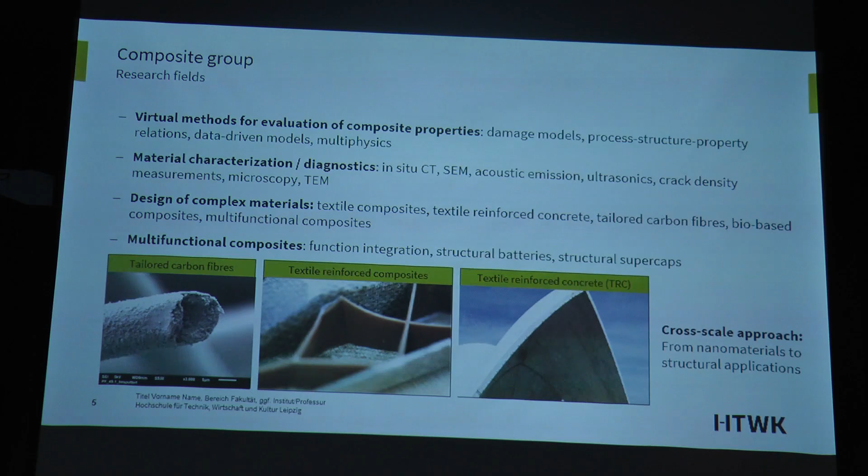I have two research groups. One research group is the so-called Composite Circularity Lab, CCL, which mainly deals with topics of circularity, recycling, sustainability. I'll show some examples of that research later in my talk. The second research group, the Advanced Materials and Structures Lab, focuses on multifunctional composites, on nanocomposites, on additive manufacturing, but also on advanced models for composite design.

So, enough talk about me. My presentation is divided into three major parts, but before coming to this, I want to briefly introduce the problem. We have heard about this in the morning session as well. There was a lot of talking already by Professor Petru or Olga about sustainability.

As you may know, the ambition of the European Union is to become the first continent who becomes climate neutral. And there's a lot of political effort also towards that direction, the Green Deal, and also the so-called twin transition, meaning green transition and digital transition.

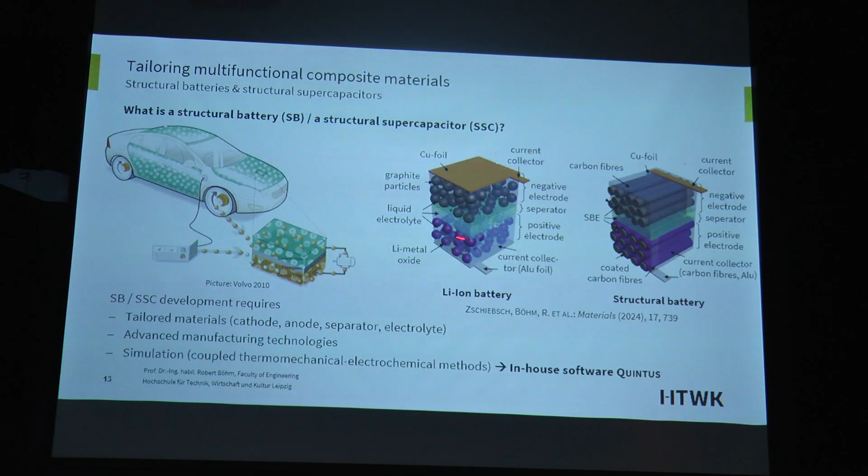Or the door of your car could be the battery. And you don't need a battery anymore, or at least smaller batteries. So there's a liquid electrolyte and a separator to avoid short circuit, and everything is packed into a pouch bag made of aluminium or copper.

So we first produce the parts of the carbon fiber of the battery. And then this is all assembled into a pouch cell and cured. And in the end you have something like this that looks pretty much like a normal battery. You see some pictures of the test on the left.

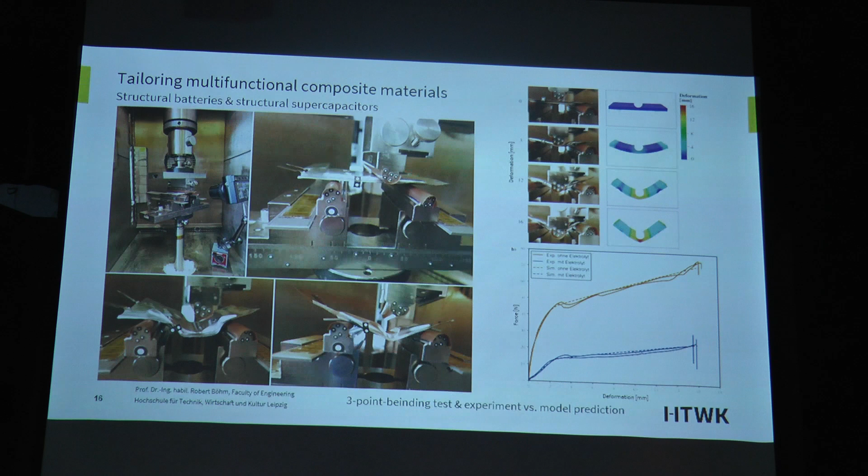And we also developed models for predicting the properties of those materials. Here in this picture you see a comparison of experiment versus simulation. It fits pretty well. So the result of that study is like this.

An increase of performance compared to the current approaches in literature with a unidirectional anode and a woven cathode. So that is actually what we have right now.

Then we have combined this with a second material, so-called carbon nanotube fibers. Everybody has heard of carbon nanotubes already, and you can also produce fibers out of that. And those fibers are very flexible. They are even so flexible you can make a knot into the fiber and it does not crack. So this is kind of spectacular.

Those materials are suitable. We have produced a drone. So this is a micro drone. So the size is here. It's very small, fits on your hand. You can put it on your hand. It looks like this.

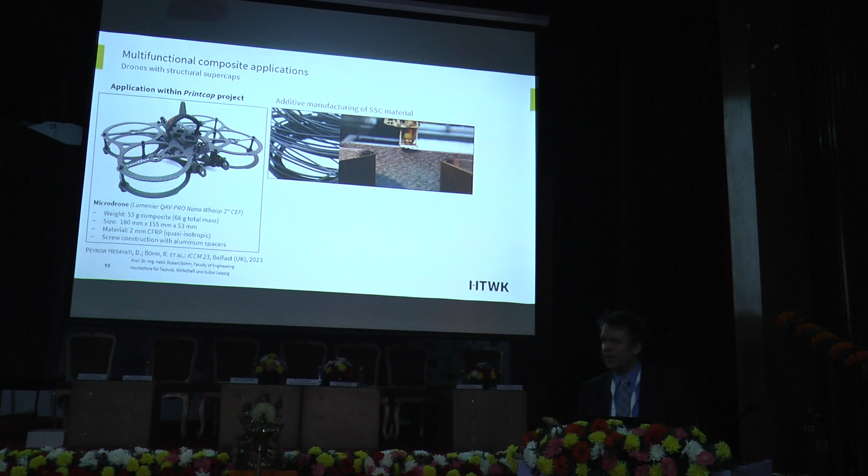We have produced the material by additive manufacturing, so 3D printing. We investigated the microstructure, did numerical simulation to prove that such a structure holds the load, and also investigated recycling issues. That's the question that comes up very often in that context.

And the end looks like this. So this is like a mini drone. There's a little video here. So we made it fly for a couple of seconds, without any battery. There's no battery inside that drone. The material itself is the battery, like I showed. So still there's a lot to improve there, but we proved that this technology is able to work out.

The second example that I'm going to show, I've picked this particularly for the Indian audience here, is nanomaterials. It's very well known that you can use nanocomposites for sensing purposes. Due to time issues, I'm not going to explain all the scientific details.

I'm coming to the application immediately. So what we have done is we produced a nanocomposite containing carbon nanomaterials. In this case, again, carbon nanotubes. We mixed the carbon nanotubes with classical polymers, and we 3D printed those devices here with standard 3D printers. So this is not rocket science, just normal printers.

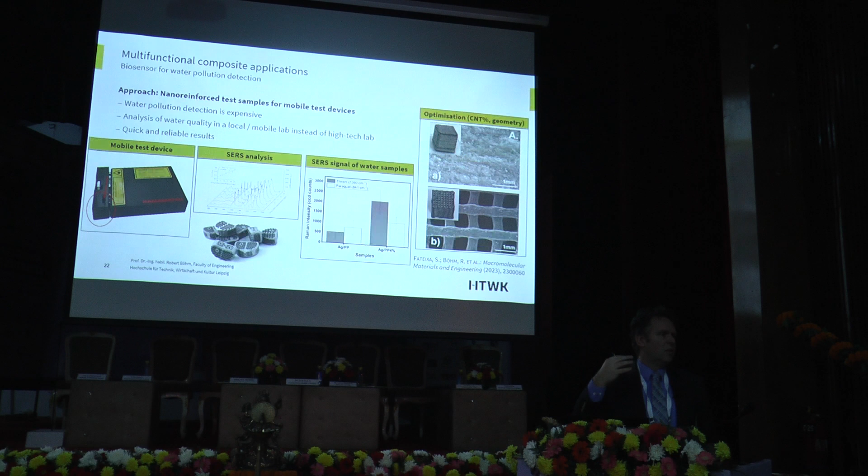Immediately, with pretty good results. So you may know that implants, like if you have implants for your head or your knee, can be produced with composites, also with 3D printing. And there the important question is, you have to have a material where human cells can grow into. So your body cells must be able to grow into that implant, to have a good connection between the implant and your real body. And we've seen that in the morning already with lattice structures.

So important here is the geometry. Different geometries, but also providing conditions for the human cells to grow into.

And there, nanomaterials or nanocomposites can help as well. So you've seen this drone already, the little object flying for a couple of seconds. And I'm doing a lot of work in modeling.

When you want to model those multifunctional materials, you have a lot of dirty multi-physics problems. A lot of people say composites are difficult, which is true, and also a challenge for us as researchers. But those multifunctional materials are even more difficult, because you have electrochemical problems. I'm not a chemist, I don't understand that stuff.

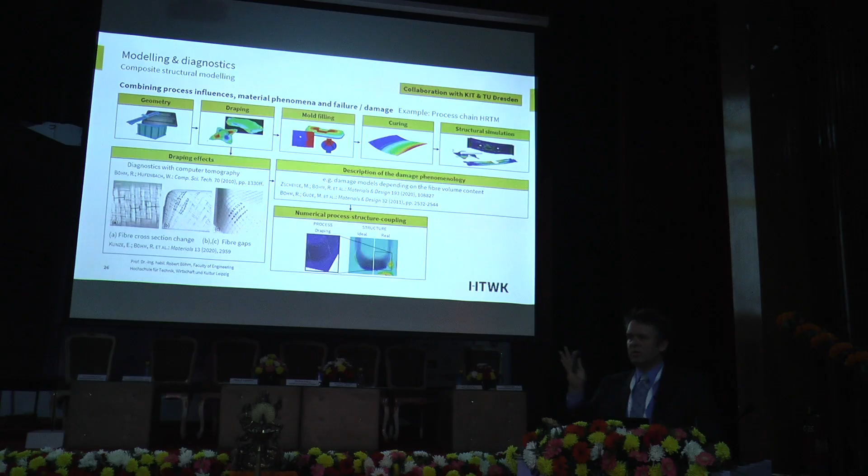Usually if you take a textile and drape it into a complex geometry like this, the textile will not look regular or as planned, but there are certain draping effects, some call it draping errors, that have to be considered. So we did a lot of work together with KIT, Karlsruhe Institute of Technology in Germany, to model those effects with the coupling of computer tomography diagnostics and simulation analysis.

And now that brings me to the third and final part of my talk: sustainability and circularity. Here I have again two examples to show.

And the first one is circularity of large-scale composites. So we have seen already this morning that we can produce large-scale composites for many applications, wind energy blades, airplanes, etc. Especially wind energy has seen a big growth in Europe, but the thing is, such a wind turbine only has a lifetime of 25 years.

And afterwards, it looks like this - it's waste. And we as composite engineers, we claim this is a high-performance material. We should not treat that as waste. I always say, I don't take my gold, my golden ring, and put it to landfill. This is expensive stuff, we should not throw it away.

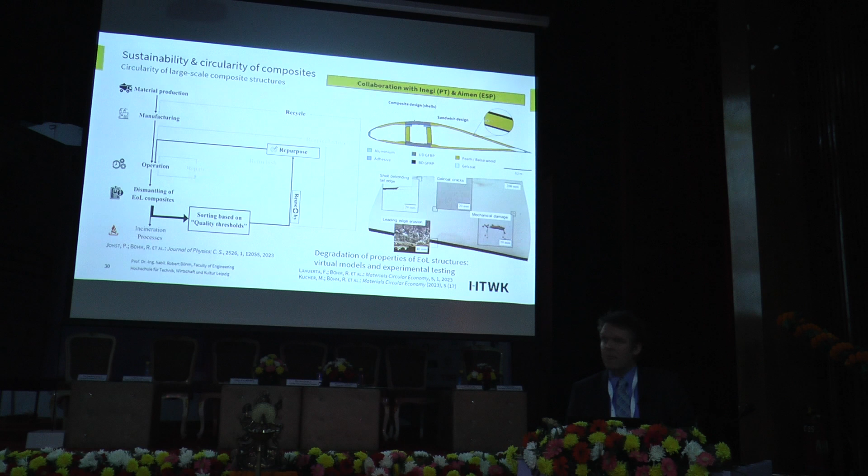So there's a lot of conversation about circularity, and the approach is to use that material again. We have created a strategy that we call the R6 strategy - so when a material is produced, put into operation, and reaches end of life, we can reuse that material for something else. What I investigated was repurposing, the reuse of a material for other purposes.

I'm going to show an example about this. What we have done is investigate floating PV systems, so swimming solar cells, which is very interesting for countries with less space. There are parts in Asia - Singapore, Hong Kong - where there's no space, but also in Europe. So a lot of people put solar cells on the water.

This has many advantages, I don't want to go into detail here, but usually those swimming solar cells are placed on regular plastic elements, which are throwaway pieces more or less, but they also create a lot of waste which can be avoided. So we put the solar cell onto a rotor blade, and then we upscaled this to a larger element with 4 solar cells - this here is 5 meters by 2 meters.

We did a lot of simulation, we produced those elements, and we also tested this in a water test, and that looks like this. So we created some waves, to prove that those elements can also be used when there's a lot of waves on the sea, etc.

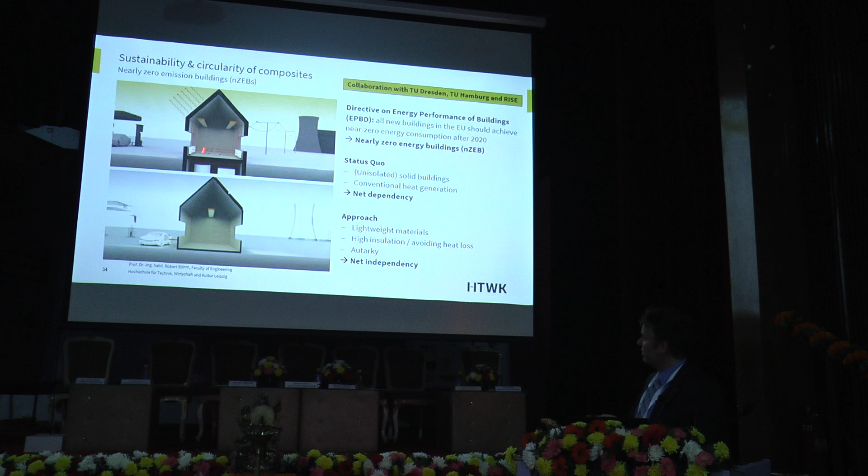So old structures look like this: thick houses. You need electricity to feed them. You have a lot of thermal losses and a lot of energy consumption. And the idea, which is also like in Europe kind of a law already, is to provide zero emission buildings,

which don't need any additional energy. You can create them probably by solar cells. And especially in a sunny country like India, you could argue, okay, you could create so much energy that you have more energy than you need, and then you can feed electric cars by this. So that is the idea. And the question now is, how can you do this?

You have to have lightweight materials. Oh, he's showing a clock. I have to stop talking. Give me 2 more minutes. You need lightweight materials with high insulation properties.

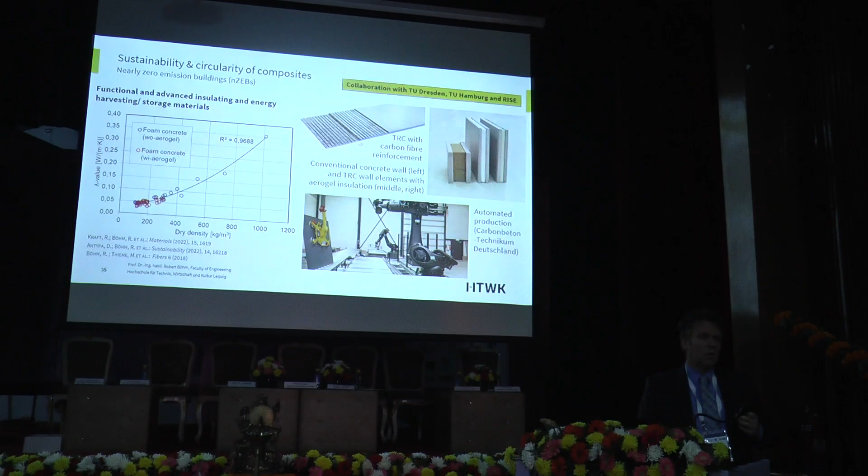And for that purpose, we used carbon concrete. So concrete reinforced with carbon fibers, and we produced sandwiches with aerogels as a sandwich core. It looks like this here. So a material which has a very low lambda value, so very good thermal properties. And we are able to produce this material in automated production.

So I'm going to skip the manufacturing due to time issues. We also tested those materials in bending experiments and show that the properties are very, very good. So that brings me to the summary of my talk. So I hope that...

May I now invite Professor Rajesh Kumar Mishra from Czech University of Life Sciences.

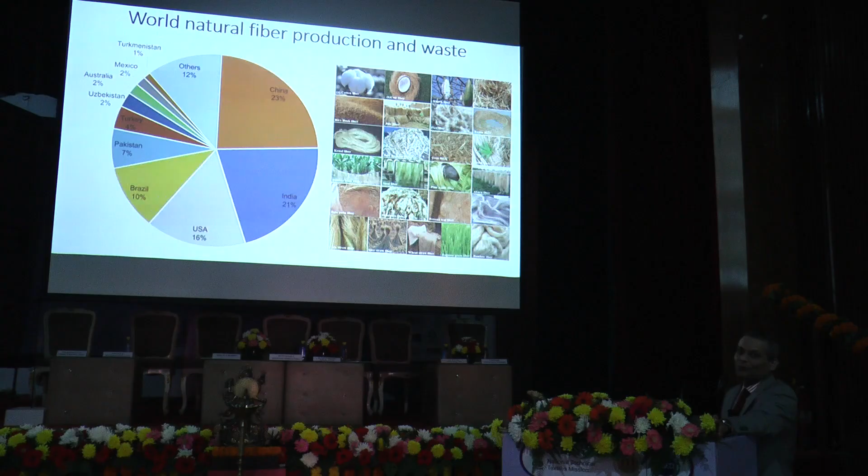India is probably one of the biggest, if China and India to be compared or not, doesn't matter, but India is growing with its potential of natural fiber and its availability. At the same time, we are also producing huge amount of waste. Waste for other industries, but it is the raw material for us as material scientists. So we try to prepare value-added, high-value products out of waste material. Today I will touch upon a few ideas how waste materials can be converted into high-value products, and that is where comes the importance of polymer-based composite materials.

As we know, cotton, hemp, sisal, bamboo fiber, fiber from pineapple waste, from coconut waste, everything from waste. We have a lot of natural fiber. Mainly when they are derived from plants, they are rich in cellulose. And cellulose is a highly crystalline ingredient which is helpful for strengthening of materials like composites.

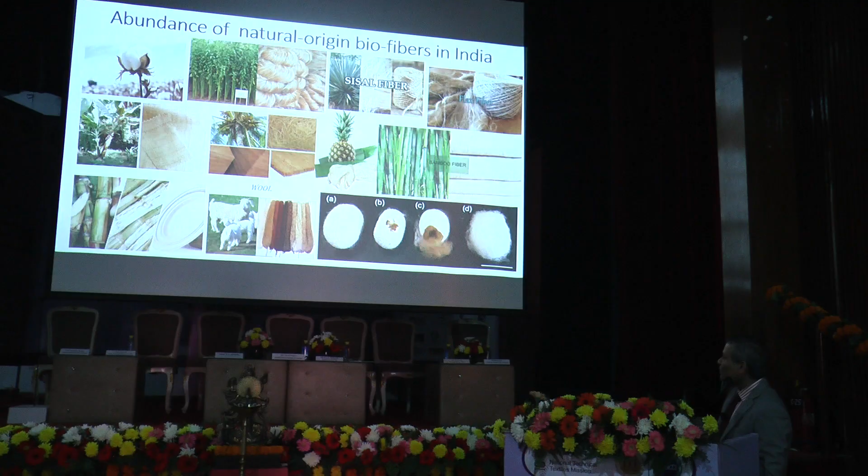At the same time, we have abundance of protein-based fibers from silk, for example. The best quality fiber is excellent for thermal insulation, for decorative textiles, but there is also a lot of waste in the process. And we are now exploring possibilities how to produce high-value composites from such waste fibers.

We cannot leave any single fiber to be wasted. It is now different era. Now little bit information how is India's outlook. There is some information on the internet, and India is one of the largest, in fact it is the largest producer of cotton and jute fiber.

And there is a big thrust to further improve production of silk and jute, etc. in future. There are many schemes coming up by the government of India, especially from the Ministry of Textiles, about cotton productivity, natural fiber scheme, silk scheme. So these are many initiatives these days being taken up, how to improve the production, application and potential of natural origin fibers in multidisciplinary applications.

And composites are one of emerging areas where we can utilize. Since I am a material scientist, I focus on agro waste. My university at present is focused on agricultural products. Fibers are natural fibers, also are agro products.

Wool from sheep is an agro product. Silk also is an agro product. But let's not forget several other waste materials from agricultural processes. For example, rice husk, the cover of a rice grain, is used as cattle feed, or sometimes people just burn it to prepare carbon. It's not a high energy producing fuel, but we try to use it in reinforcement of composites.

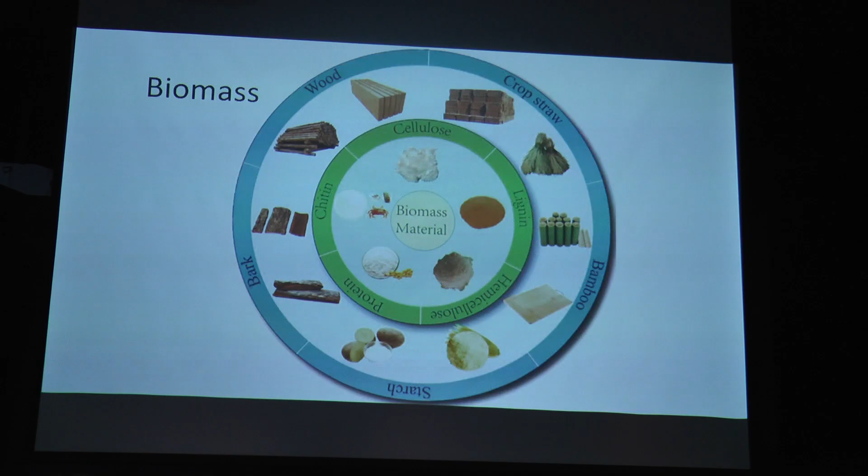Composite - I think the definition is not required because you already understand there is a reinforcement and a matrix, and in this case we are using fiber material as reinforcement. Fibers, which are core to textile engineering, are a very special form mainly of polymers because of the high orientation of polymer chains along the axis. I won't go too much into the cellulose and ingredients of plant products, but we must keep in mind cellulose is key to reinforcement in composites.

We already know for centuries that a lot of fibers exist in nature, starting from cotton to jute, some fibers from fruits, some fibers from leaves, some fibers from stem, and now we will explore possibilities to extract fibers from other lesser known parts of the plant.

Whatever we do, we are attached to nature. We are part of nature, and nature is the source of all scientific innovations. If we understand things around us, we are able to produce and reproduce things. In fact, if we learn from nature, we will be excellent scientists.

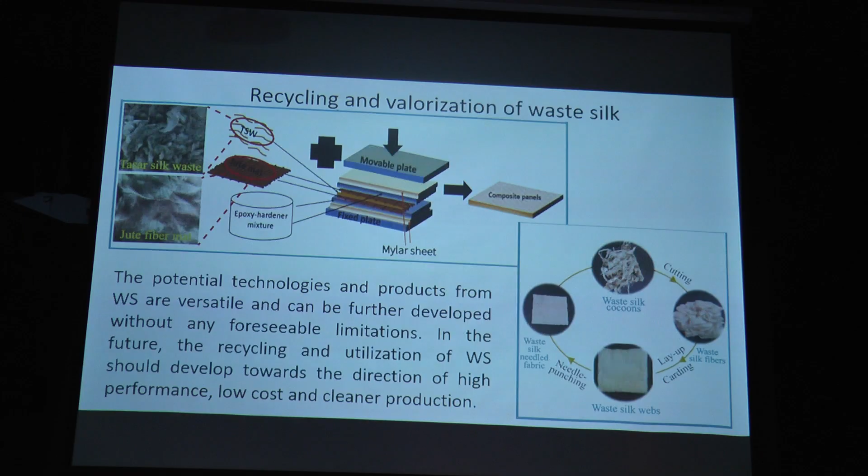In this case, many of my colleagues spoke about making sandwich composites. We make layers of natural fiber, layers of synthetic fiber, glass fiber, with jute, with flax, woven fabrics, non-woven fabrics, and make a comprehensive three-dimensional robust composite.

Maybe you are aware that the whole building can be 3D printed, not just brick by brick and being plastered. The conventional process takes 6 months, 1 year, 10 years, but this process is much faster. For example, an auditorium like this can be 3D printed in 1 week's time, and it will still be robust and strong because it is built step-by-step, layer by layer.

India, like many other countries with big oceans, has plenty of coconut. Coconut is a nice fruit, but there is a lot of waste fiber, coconut husk, coconut fiber. We prepare carpets, ropes, they already exist, but still there is waste. Any textile process produces a lot of waste. Also as consumers, we produce a lot of used clothes annually. We are trying to find ways to recycle and reuse such consumer waste, agricultural waste, and textile industry waste.

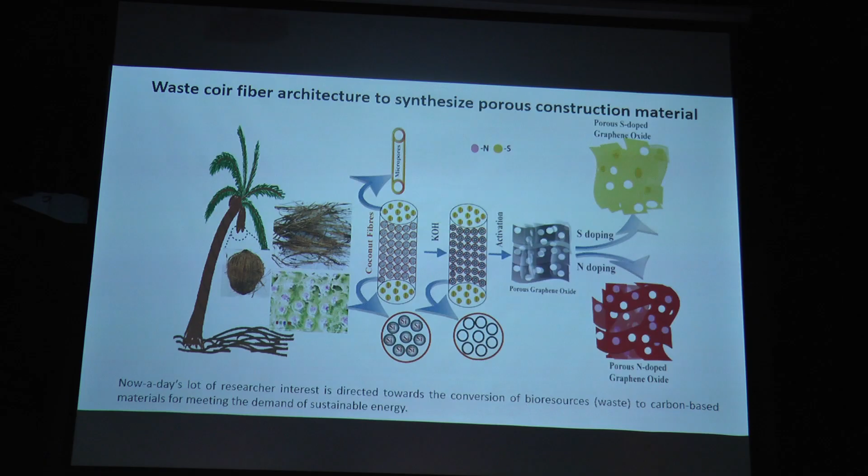In which processes do we produce a lot of waste in textile processing? For example, in cotton carding, combing, there is a lot of short fiber, and conventionally that is used for making pillows or something, or discarded as oil waste. So now our goal is to identify such waste materials. For example, hard waste in weaving can also be made into secondary yarns.

We are using it in automotive applications, for example. It needs to absorb sound and noise, and these fibers are very good candidates because they have channels of air which can absorb sound.

Corn is produced in India and everywhere in the world, and except for the crop, there is a lot of fibrous waste from the leaves and from the cob, and it's possible to extract these fibers for reinforcement.

You know this process, squeezing sugar cane to produce juice and sugar afterwards. But this bagasse, or the waste of sugar cane, is also highly fibrous material. It's not just good for composting or burning. We are able to extract fibers, not for wearing, but definitely for reinforcement into composites by impregnation with some suitable resin. There are examples where such materials are combined with other synthetic fibers.

Why synthetic fibers? Still, we are in a hybrid stage. Why? Synthetic fibers are definitely stronger because we know how to create stronger fibers. Nature produces fibers that are not perfectly oriented, not perfectly crystalline, but they are degradable and sustainable. Therefore, we try to adopt natural materials and combine them with high performance fibers, maybe high performance waste fibers, and this hybrid material is definitely a solution at this stage because they are partly degradable, partly high performance.

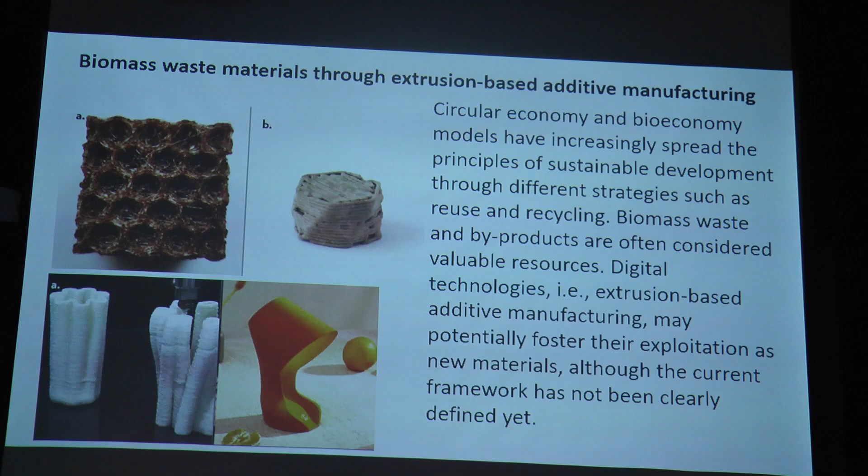3D printing or additive manufacturing is a very good technique because it involves high precision. At the same time, the raw material can be based on natural fillers. I talked about hybridization, so sometimes recycled plastic bottles are combined with biomass, especially from agricultural waste, to produce composites. Currently, our research is focused on hybrid composites, combining natural fibers, natural waste, and waste of synthetics.

What are applications of such composites? For lightweight yet robust transportation systems, furniture, sports items, also automotive components - I will show something later. Another very high value fiber waste is from palm fiber. I will skip some things, but I will mention definitely what are the potential candidates of fiber waste for making composites.

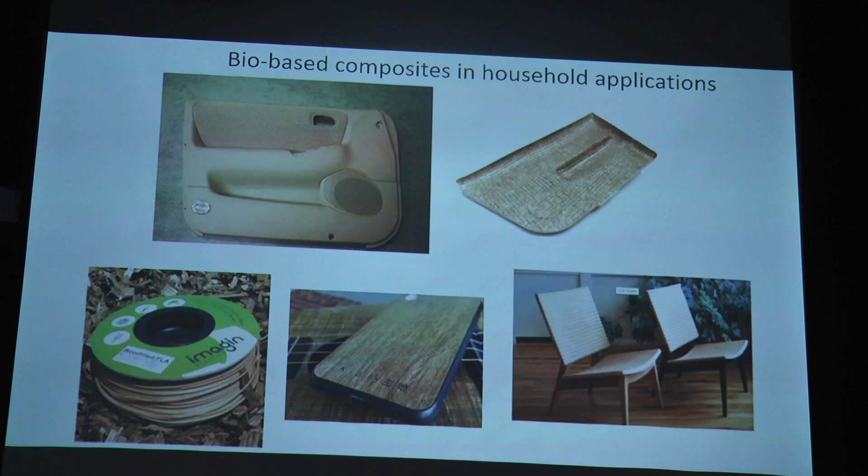Here are examples of automotive applications, buildings, electrical insulation because they are insulators of electricity, for ships and things like that. We can make construction materials, for example artificial wood from wood particles for housing, and porous concrete. This is especially important in snowy countries or when there is high rain, so this concrete can drain the water down, and also these channels are very good for thermal insulation.

We have an abundance of bast fibers from other agricultural crops. We can make composites, and I want to just mention that some of these natural fiber based composites are no less than synthetic fiber based composites. Therefore, flax, for example, is excellent to replace glass or carbon in certain cases, not everywhere. Bicycles are made from composites.

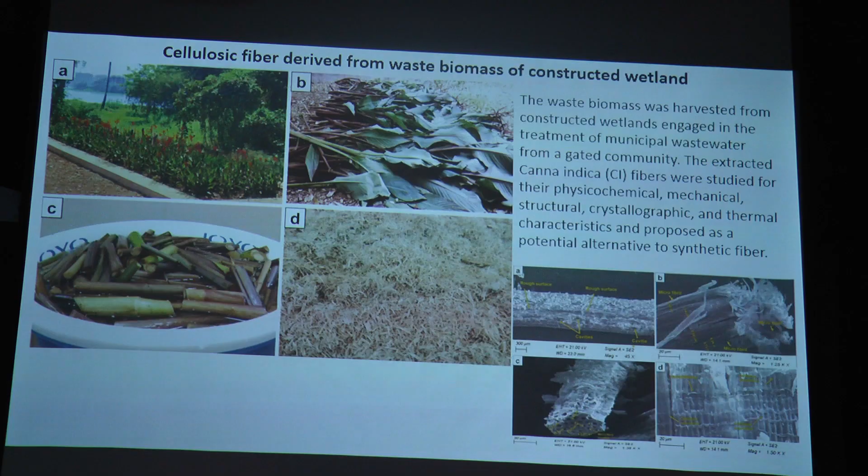Some porous plants like the banana stem and wetland plants are also porous for making composites with sound insulation performance. Sound insulation is important in today's context, as a lot of vehicles and noise are being produced.

Waste of wool - there are many advantages of natural fiber based composites, but there are also some critical issues to be taken care of. We have to make a compromise.

What about buildings? Here is a special construction material made from bamboo and glass. So it's possible - bamboo can sometimes be misleading, because bamboo fiber is not produced directly from the plant but by a chemical process like solvent spinning, as we know.

So this is otherwise natural bamboo. We make construction materials to make houses. Basalt is high value fiber from nature, also from volcanoes. We combine basalt with jute, basalt with natural fibers to have high value composites. Coconut shell, for example, we use it for making particles of micron and nano size to be used in fillers.

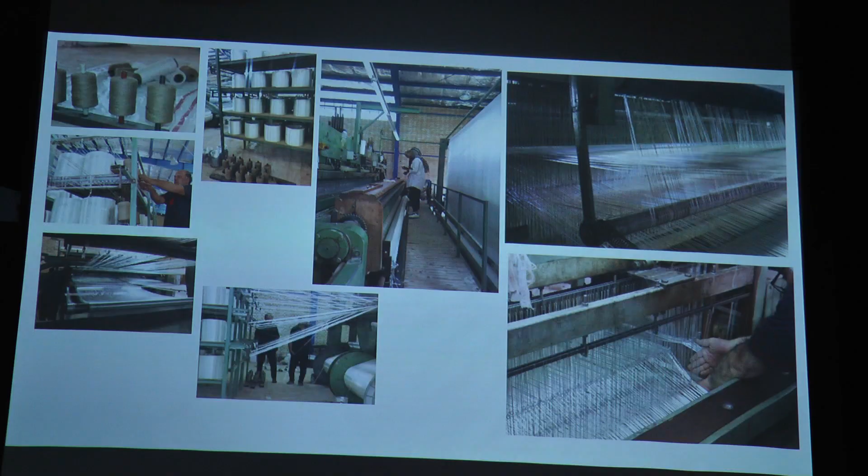Professor Robert and others spoke about nano composites. So we use natural fillers from agro waste in composites. We make hybrid composites. Here is an example of a spacer composite - you can see jute fiber, polyester and resin epoxy. These spacers are very good for small kiosks in airports, containers, trucks, like that. And you can see samples.

These are based on natural fiber and synthetic hybridization. They have excellent sound absorption. We do a little bit of modeling as well. Compressional resilience is excellent because these spacers can act like springs. They can absorb the impact and recover. For example, you can think of applications in military and other fields.

So I want to thank everyone for your kind attention. And

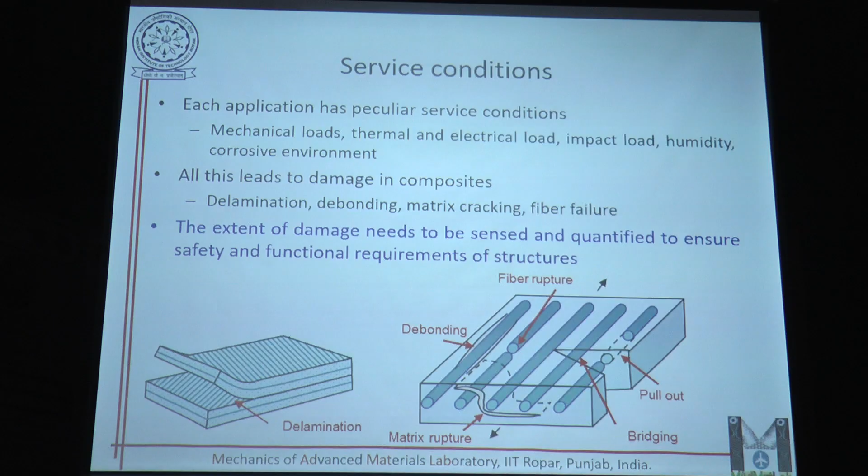Now all these basically lead to different kinds of damages in the system. One of the primary damages in composites that we all know is delamination, which is the breaking between the plies, or debonding, which is the failure of the bond between the matrix and the fiber, matrix cracking, and fiber failure. Now, when we want to ensure the safety of operations during service conditions, it is very important to quantify and assess this damage.

Where is the damage, how wide or large is it, and how is it going to affect the service life of the component? These are very important questions we need to ask, and we are trying ways to address this through the intervention of nanotechnology in the composite design itself.

So what is the challenge here? Unlike metals, there are a lot of good techniques available, like radiography or CT scan, where we can detect damage during quality control at the industry scale. But composites are a completely different ball game altogether.

Why? Because they are inhomogeneous and anisotropic, and that creates a lot of problems. The second problem is that many times delamination is not on the surface, it is in the bulk of the system. So from the outside you don't see it - it looks perfectly fine, but inside the damage is growing without you even knowing it. And then it leads to catastrophic failure, because once the damage is sufficiently large, you cannot prevent it anymore.

Then multiple modes exist, right? Like I mentioned in the previous slide, there is debonding, delamination, and fiber cracking. All of these make it difficult to detect the damage correctly. But of course, when there is a problem, it makes it more interesting, and that's why we are working on it.

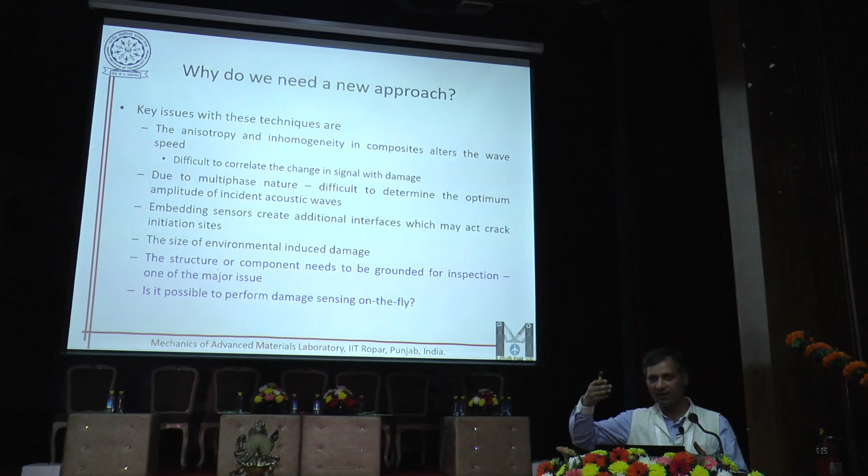The problem with these approaches is that, for example, if you are using ultrasonic waves, the wave speed will be different in a fiber versus a matrix. Once you get the change in signal, you have to relate it to the damage. Because there are multiple materials present inside the system, you don't know whether the change in signal is because of the interface or because of the real damage. That's a big question these people are asking.

Same thing if you are using an acoustic based technique. What is the optimum amplitude to send to the material or structure so that I can capture the damage? So these are some of the limitations, that these methods are not as efficient in detecting damage in composites as compared to their efficiency in metals.

Then if you are using embedded sensors, basically you are creating more interfaces into the system. The more interfaces, they basically act as crack nucleating sites, and the crack starts propagating there, because materials don't like any interfaces.

Then other thing is the size of environmental damage. So when you have a wind turbine exposed to a lot of varying atmospheric conditions, there will be a big scatter in the size of the damage. Some damage may be in millimeters, some in microns. So what kind of technique are you going to follow? Those are the questions that motivated us to go for an alternative technique.

Another big problem with these techniques is that you have to ground the structure. For example, your aircraft is flying and you want to inspect it. You cannot do it on the fly. You have to ground the aircraft, you have to ground the component or structure. So that means it cannot be used during the time it is being inspected.

So the question is, how can we accurately monitor all these kinds of damage, and is it possible to do the same thing on the fly, without really grounding the structure? That will save a lot of time in terms of inspection and associated cost. So what exactly are we looking for? An efficient strategy that can sense the damage while the component is really in use.

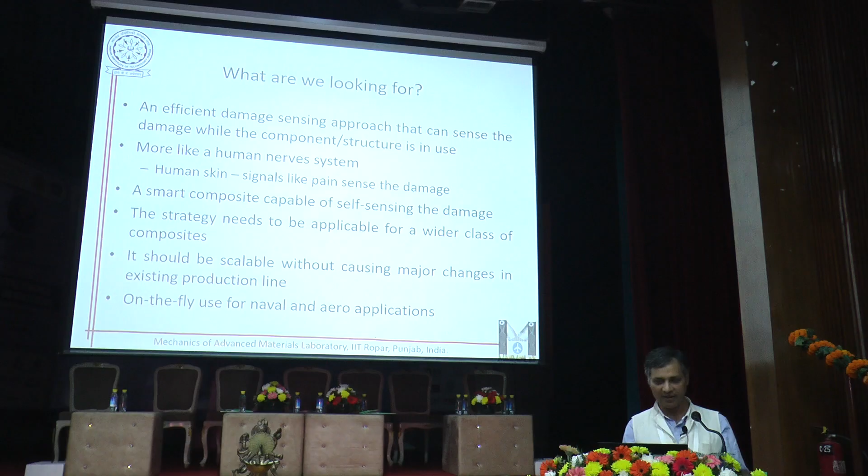If you look at the analogy of our human nervous system: whenever we have a cut, we always get a sensor, which sends a signal that you feel as pain. That pain tells you where the cut is and how big it is, without really looking at it. So what we want to create is some kind of smart composite which has its own nervous system, so that whenever there is damage or some discontinuity in the system, we can sense it.

Now, once we are okay with the idea, the next question is, can I scale it for industrial use? Because if it only remains in the lab, it is useless. So that's another question we are looking at. Another thing is on-the-fly use for naval and aero applications, because there's a huge cost associated with grounding the system, and we don't want that.

So it's not really a new concept, the problem is that nobody has used it for insulating materials like Kevlar or glass fiber composite. What we're trying to do is, whenever there is damage, meaning a discontinuity in the system, that discontinuity will lead to a local increase in the resistance of the material. If we can monitor that change in resistance as a function of the damage and map it to the size of the damage, we know where the damage is and how big it is. That is what we are trying to create here.

Now the problem with Kevlar is that it's a very high resistance material, so it is very difficult to accurately monitor the change in resistance, because the resistance is on the order of 10 to the power 6. When something is megaohms or even higher, if there is a change of 10 ohms, you can't detect it, it is almost negligibly small.

So first we need to work out basically in terms of the resistance, we need to improve the conductivity of the Kevlar or decrease the electrical resistance of the Kevlar. On the other hand, you have CNT, which is very highly electrically conducting material. It has very good electrical properties, optical properties, almost all properties are good.

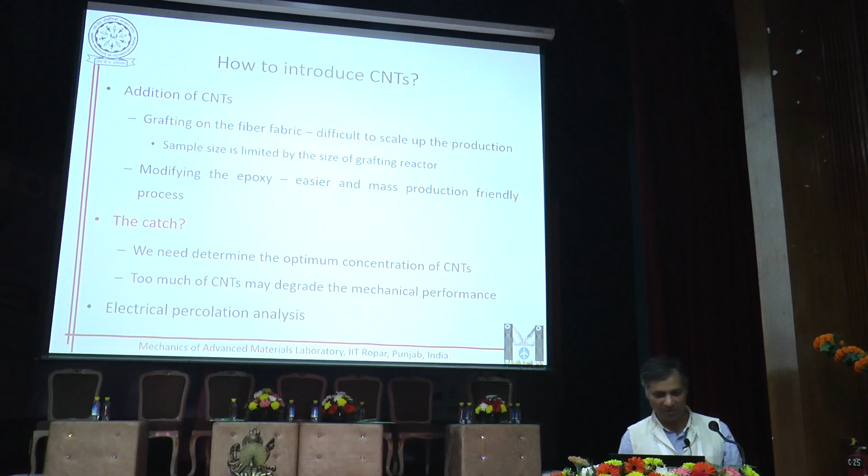Okay, so this is easier. Of course it is easy to scale also, because you just have to use the modified resin in your existing manufacturing setup. So you don't need to make any wholesale change in the production line of the composite. That's attractive for the industrial people.

Now the catch here is that we need to determine the optimum concentration - how much CNT to be used, what is the right amount of CNT. Because if you are doing too much, there are other consequences. For example, the viscosity of the resin will be too high, and you cannot process the composite using all the composite processing techniques. So those challenges will come.

So that's what we determined using electrical percolation analysis. Of course there is a lot of theoretical framework that I am not going too much into. But after doing some theoretical calculation, we basically came up with a concentration of about 0.58%, and then we verified it with the experiment by dispersing the CNTs into epoxy using probe sonication.

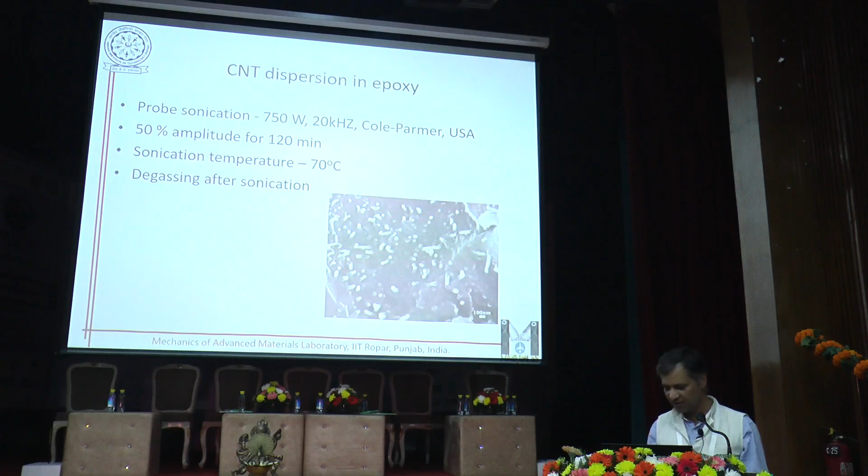And that has a very detrimental effect on the composite properties, because the wetting of the fabric will not be proper when your resin is more viscous. So you don't have a good bonding between the fiber and the matrix, or you have poor debonding strength. So basically, from this analysis we came up with 0.58% as an okay choice to modify the conventional resin system.

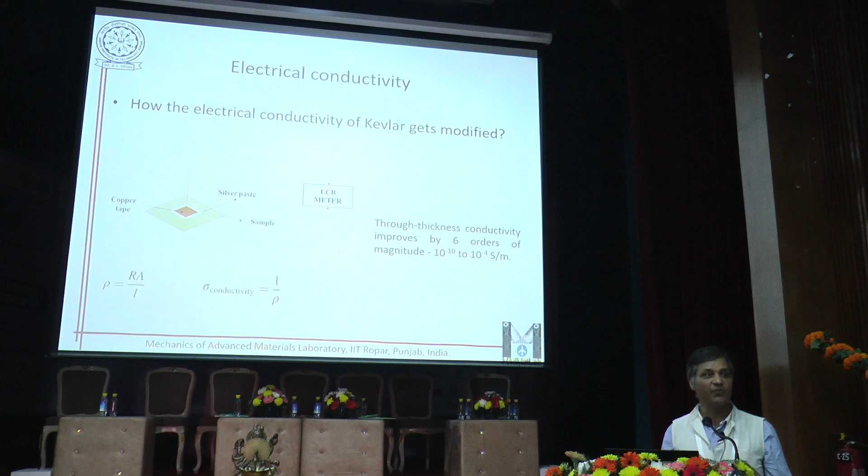Then we did the electrical analysis. There is a huge jump in electrical conductivity, improved by an order of 6. So 10⁻10 Siemens per meter is the conventional electrical conductivity of conventional Kevlar composite, and it goes to 10⁻4. It's a quite big jump in terms of electrical conductivity, which means the resistance of the composite has come down significantly. Now we can basically monitor the change in resistance through our measurements.

Okay, let's do it. Then we tested almost all kinds of properties with respect to the mechanical properties of the composite. For example, interlaminar shear strength shows a 36% increase, and mode 1, mode 2 fracture toughness also improves quite a lot. Mode 1 is more like 60%, and mode 2 is about 30%.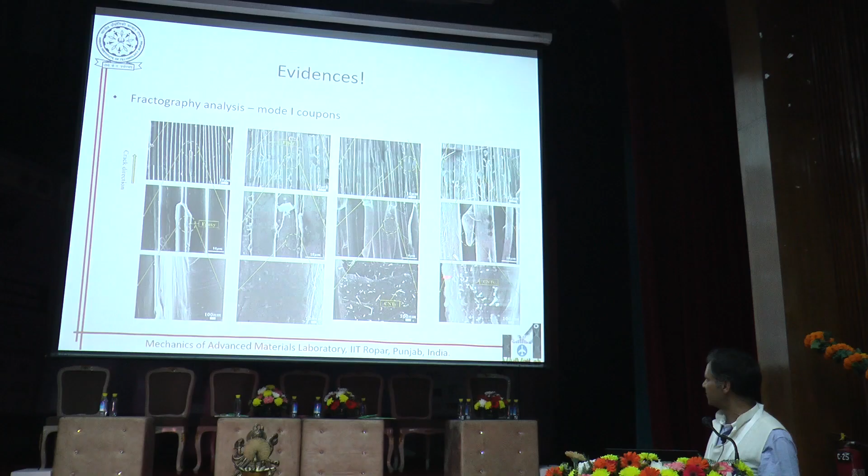So we have good evidence to support this mechanism. You can do the fractography analysis, look more carefully at the pictures, like you see a lot of matrix cracking, and these are CNTs pulling out here, so they take extra energy from the system, and same thing we observed in mode 2 as well. So all these mechanisms lead to higher toughness or higher mechanical properties.

Okay, then we looked at the damage sensing, right? So we have done two tests, this is under mode 1 and this is under mode 2. You look, this is quite interesting. What we have plotted here is the change in resistance normalized by the base resistance, and this is the percentage. So as you basically apply the load or apply the displacement, the load is increasing, and then resistance initially there is not significant change, but then it actually builds up, right?

So this is basically where the damage coalesces or damage evolves. Now at this point there is a sudden jump in the resistance, which basically marks the propagation of the crack inside the sample, which means there is a sudden failure in the system, right? And the same thing basically happens in mode 2 analysis. So this gives us a way to monitor the size of the crack inside the system, right?

Okay, this is one of the objectives that we want to see. The second question that we wanted to ask is, how can we use this in terms of other materials, right? So for that, first we need to understand how the variation of delta R with respect to delta a. Delta a is the size of the damage here, and then we can fit a power law type equation, where K and N become the material parameters, and for Kevlar it is about 2.2 for K and N is this.

But then the question is, is this applicable only for Kevlar? I mean, power law, you can fit anything with the power law right now, right? So then we tested some other compositions of the same thing, layered materials, right? You look here, like we have carbon fiber, glass fiber, and fiber metal laminates, these are glare panels. So we have tested the same thing in all these layered systems, and we found that the power law predicts the change in the evolution of the resistance quite well in all kinds of layered materials, with of course different K and N.

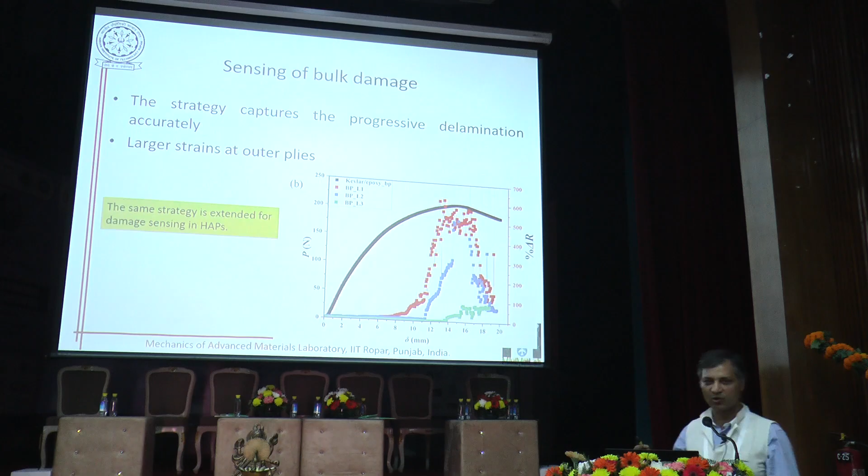Again, we used a similar kind of technique to detect the delamination in the bulk system. We put these bucky paper sheets, which are basically sheets of CNTs, between the laminas, and then we verified the same thing here. You can see that if you put them at different layers, you can basically monitor the progressive damage in the composite, because each signal comes after a certain time. So we can see how the damage grows inside the system.

So just to conclude the takeaway here, CNT dispersion allows you to monitor the change, basically monitor damage in the system. It also helps in improving the mechanical properties, right?

Okay, now we are looking to scale it up to use in some real application. I just quickly want to show this. So now the next step that we are trying to make is basically a textile which is more smart, just like our chameleon.

You can look at the change in the color. So what we are trying to integrate this with our damage sensing mechanism. So together we will have a very advanced system in terms of technical textiles which are used in the defense application mostly.

Thank you for your attention. And yeah, maybe you can get more ideas from talking with you. Thank you very much. Economical.

They might be more economical, but they will lack in the accuracy. So it depends on how accurately you want to measure the damage. But for concrete, it will work. We have seen now.

I'll be in touch. Thank you for your interaction. And since we are running sort of... Bye.

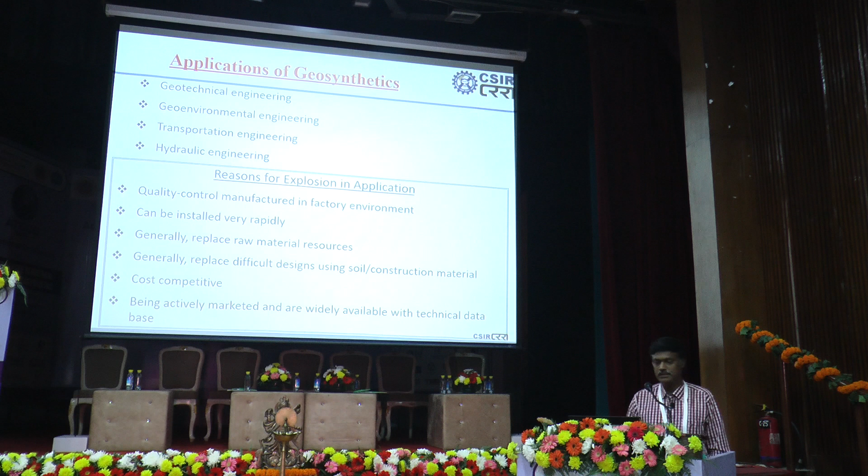And what are the applications? Geosynthetics will be applicable in the area of geotechnical engineering, geo-environmental, transportation, hydraulic. Why? Because we will get very good quality, whatever strength we need, within the time. So, without going deeper, these are the types of geosynthetics we use in geotechnical applications: geotextile, geomembrane, geogrid, clay liner, geocells, geocomposites, and so on.

So these are the geotextiles. You know very well that geotextiles are woven and non-woven. And geogrids, basically we use uniaxial geogrids for flyovers, and biaxial geogrids are useful for improving the bearing capacity. So these geogrids we use for flyovers, and biaxial especially we use for improving bearing capacities. And geonets, geomembranes,

especially, and geocells, wherever the subgrade CBR is very poor, geocells will give confinement for the material.

So geocomposites, especially for drainage purposes we are using, and these are geocomposite matrices for erosion control. Geofoam is a very good material where the subgrade is very poor and it won't take much load on the soil. We can use geofoam since the density will be very low, so it can be used, but we are not using it much because of non-availability. Otherwise the quantity is good here. If someone requests it, then we can use it in the field. The field is ready already.

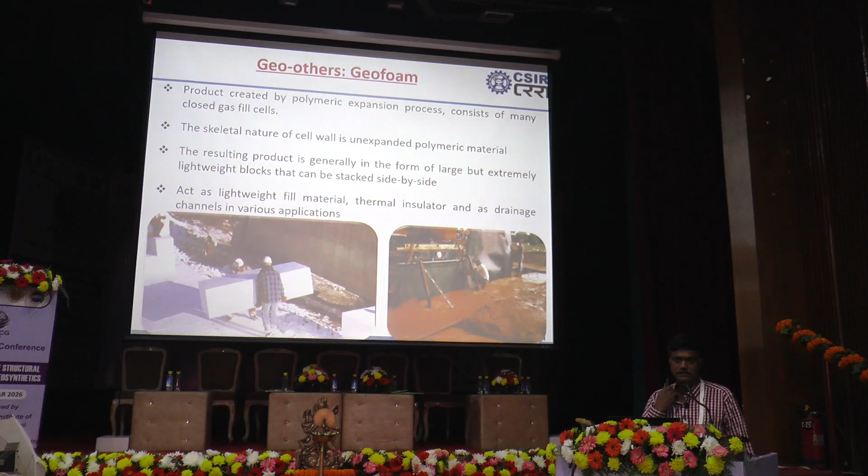And basically in geosynthetics, in the geotechnical area, we use them as a reinforcement, separation, filtration, drainage, fluid barriers and protection. These are the basic functions we use for geotechnical applications, and each material has its own function. So this is the table where we can use geotextiles.

So in such areas what we are doing is using geogrid or geocells, or a combination of both, at the subgrade level, so that your modulus of improvement factor increases, especially for black cotton soil.

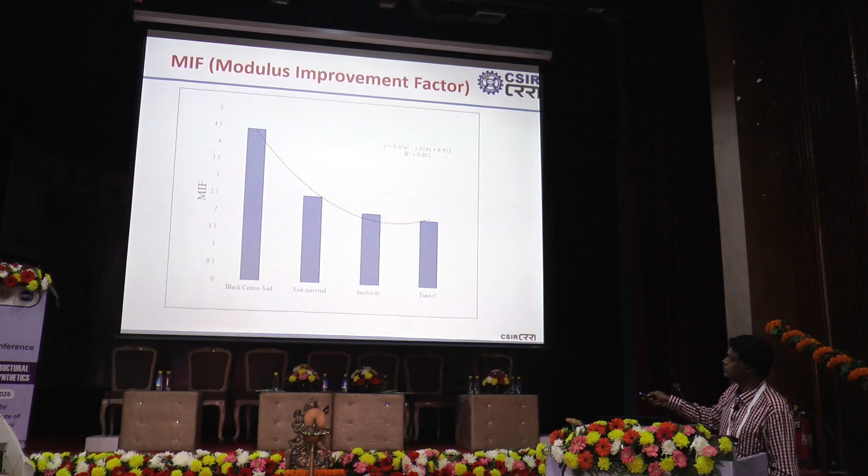In black cotton soil, the CBR (California Bearing Ratio) will be very low. If it comes to landslide material or weak material, the modulus improvement factor is low. So basically, if you want to use the geocell, we cannot use it blindly. Wherever the bearing capacity is low, meaning subgrade is low and CBR is low, that's where we have to use it. Only then will we get the advantage. Otherwise, if you use it elsewhere, you won't get much advantage.

See, this is the base course thickness, the pavement layer thickness. If the modulus improvement factor is 1, and the thickness is 250, and the remaining thicknesses are the same, here it becomes 125. So what we can do is reduce the base course thickness by approximately 14 to 50% if we use geocells.

So this is the pavement layer thickness. If you compare conventional normal pavement thickness with using geocells, the pavement thickness can be reduced. We can reduce the DBM layer by around 35%. The DBM layer is actually a very costly affair, so if you can save 35%, it's a good saving of material.

Similarly, geocells can also be used like a reinforced wall. This is in Bhutan, in the BRO compound, where they use it for car parking. So you can use it like this also. This is one of the applications of geocells.

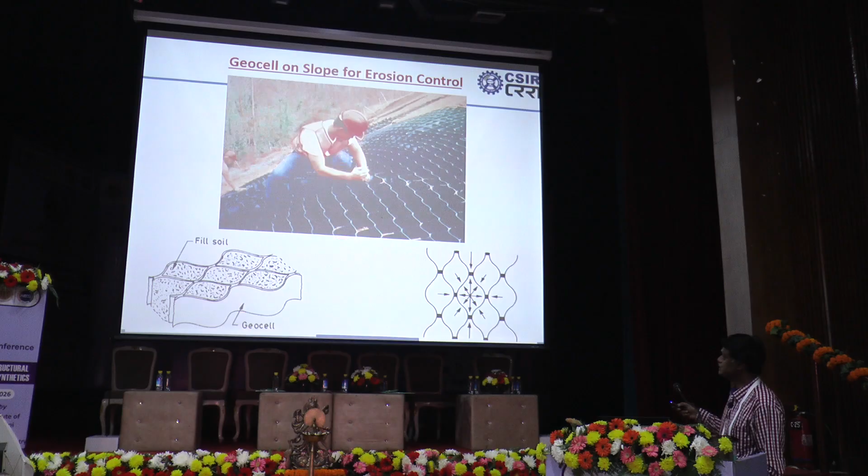This is a very common problem in highways - you will see many gully erosions along the embankments, even deeper ones. So if you want to prevent that, we can use geocells along the slopes. Like this, along the slopes, you can use them and fill up with soil so that you can avoid cracks on the embankment slope and prevent erosion.

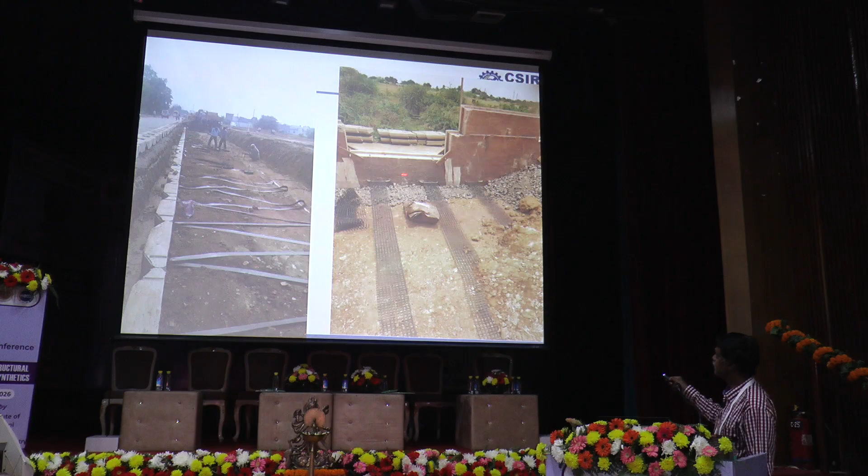So the main advantage of applying geosynthetics is this: here we have to use 600 mm of aggregate layer for the drainage bay. But instead of this 600 mm drainage bay, if I use a geocomposite drain, I can save 600 mm of material from natural resources. So you can save natural resources indirectly - that's the application of geosynthetics, because by using geocomposite, I can eliminate 600 mm of natural aggregates.

In the application of geosynthetics for ground improvement, we can use geotextile encased stone columns or geogrid encased stone columns. These all improve the ground, improving the bearing capacity. So this is one of the best examples of the application of geosynthetics.

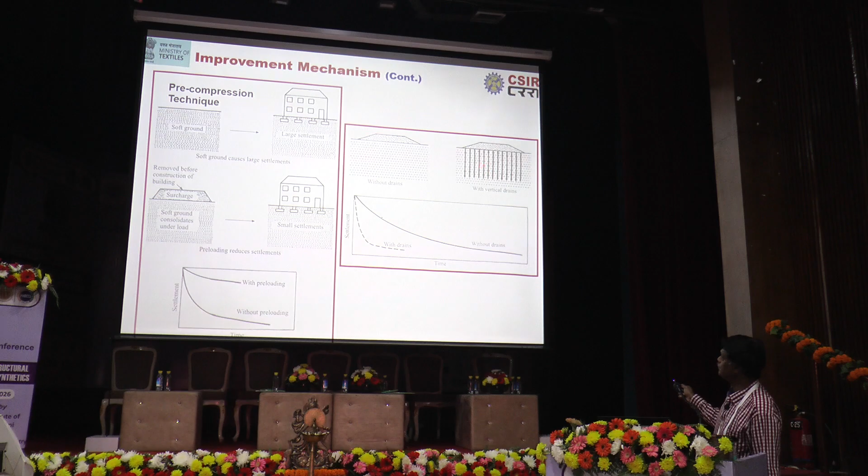And if the ground is again very soft and you have to put more loads, the use of vertical drains, polymeric drains, makes your settlement much faster. This is the settlement time it will take without drains. If you use the drains, the settlement will be much faster.

Here we have used PVDs, prefabricated vertical drains. This is called a stitcher, and this is the technique we used in the Visakhapatnam Port Connectivity Project. And these are the PVD drains.

Similarly, for hill roads, if you want to cut the hill slope, you will get many landslides. You will always see in the news during the rainy season frequent landslides. To prevent that, instead of cutting the slope like this, if I go for a downhill side a reinforced soil wall, you can get a stable slope. Similarly, you can construct reinforced soil walls toward the downhill side like this. So here also a lot of applications of geosynthetics are there.

So what are the don'ts? The technology is there, but if you are not using it properly, what will happen? If you don't get proper vegetation, later it will tear the textile and it won't serve the purpose. At the same time, you can use it as an erosion control matrix, but if soil is not there and vegetation growth is not there, then it won't serve any purpose.

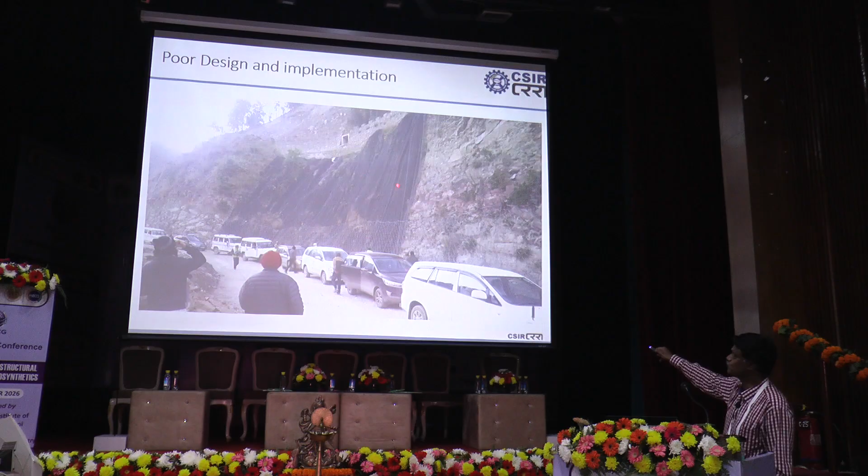Similarly, you can see, for protecting the slope they used the geotextile, but the culvert is right on top. So what will happen? You have spent the money, but once the discharge comes, the entire material will be wasted. So during application, you have to use your mind, and at the same time give proper designs.

So these are some of the applications you can see. If you don't anchor it properly, the entire geotextile fails. Then they will say the technology is flawed, because no one wants to blame themselves, they will blame the technology. If you don't anchor properly, you will see here they are not properly anchored at the top, and that's why the outcome is like this.

Here we have to use soil of 75 mm, but they are using boulders. What will happen if you use material like this? It will cut the geogrid and damage it. You can see the size of the material.

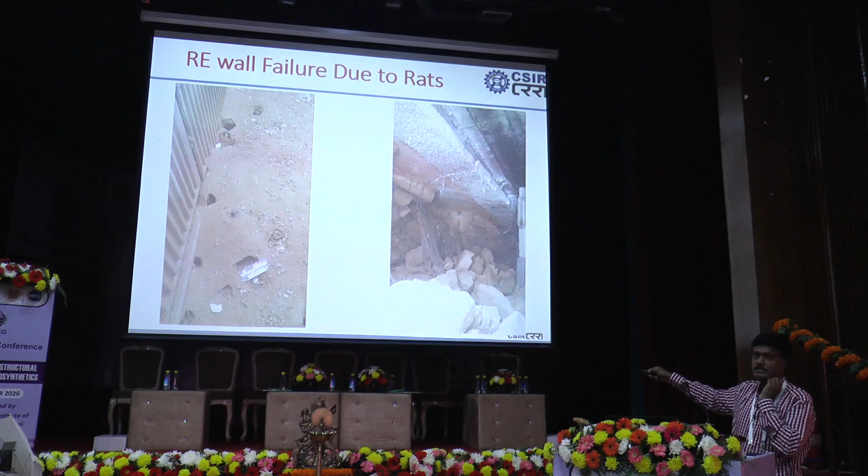And if your drainage is not proper, the wall may fail. So the main conclusion is that the utilization of geosynthetics can expedite the construction of civil infrastructure. But if geosynthetics are used properly in construction, the structural life, strength and conservation of natural resources will increase. Major disasters will result if the structures are poorly built and there is inadequate management or poor implementation.

So the technology is readily available and it can do many wonders. But at the same time, if you won't implement properly and manage the site properly, it will lead to major disasters, and finally they will blame the product rather than the implementation.

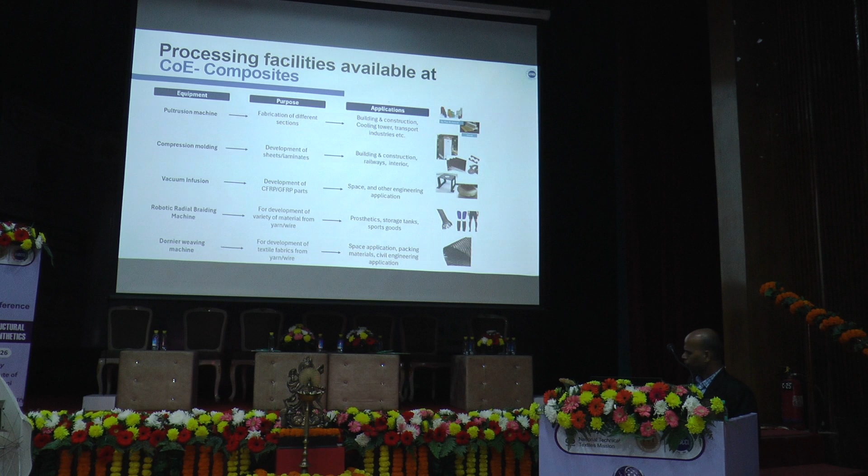So they can be used in various applications. For example, infusion we use for developing different space components for ISRO. In the same way, pultrusion we use for different profiles for building and construction. Then weaving and braiding are used to come up with glass and carbon based fabrics, either woven or braided fabric for defense applications and even railways.

So these are actually images of the facilities we have. So radial braiding, with 176 carriers. This is the largest radial braiding machine available in India. It was actually established 15 years ago. At that time, it was the largest in Asia.

We also have weaving for glass and carbon. Then this is the pultrusion machine. You can also see the graphic. It's all about production of continuous length composites. Generally, composites are known for fabricated customized structures, but there is continuous operation also in composites, that is pultrusion, and we do have a pilot machine and trial production facility for all these activities that I have mentioned.

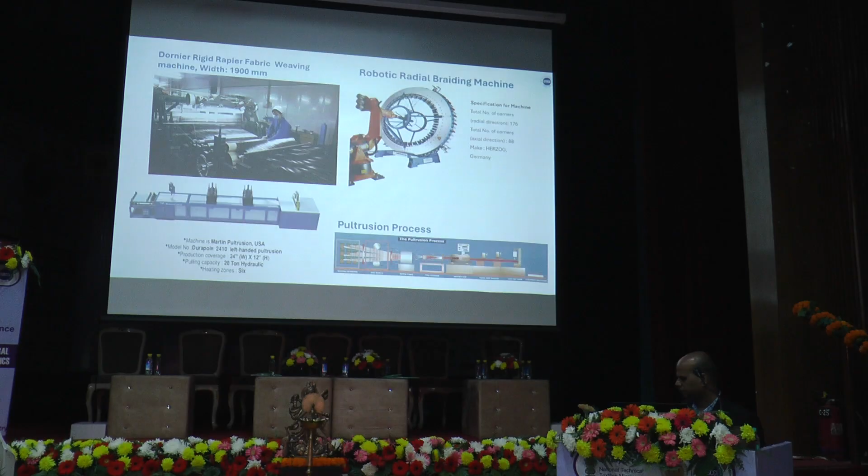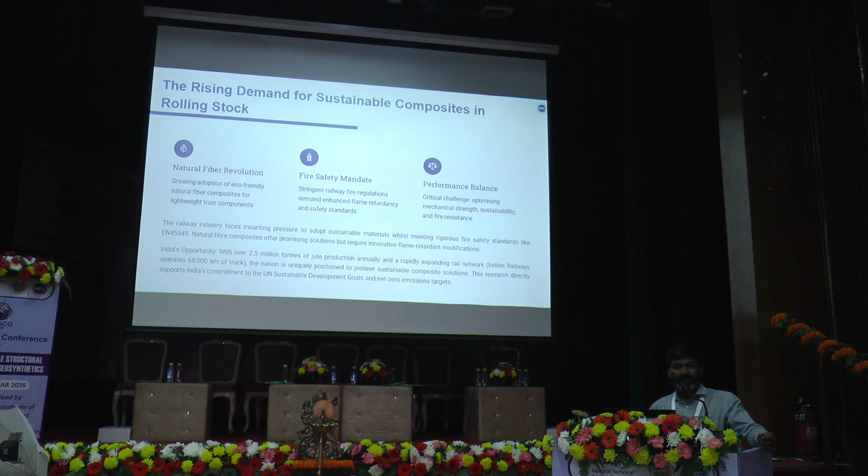So once we are talking about improvement of the fire retardancy into the natural fiber composite, somewhat we have to be compromised with the mechanical performance. So this is also a critical challenge, that without compromising too much on the mechanical performance of the composite, how we can improve the fire retardancy in natural fibers.

So I'm just skipping this because the ultimate objective is to enhance the fire retardancy. Dual phase approach means what? Right now whatever composites are coming to the market for railway application, that is with matrix modification, like they are adding some fire retardant additive into the matrix itself, and they are using glass fiber majorly. But in order to introduce the natural fiber, as we know natural fiber can easily catch fire. So at the fiber level, how we can improve the fire retardancy, ultimately it affects the end performance of a composite. So here effort has been made to improve the fire retardancy at the fabric level, then subsequently at the composite level. So that's why in that way it will be a two-phase approach.

Fire retardants are not only for rolling stock applications. Wherever we are using composites, fire norms are mandated, whether we talk about automotive, building and construction, or even airways. Different standards exist, out of which railway and airways have relatively stringent criteria that need to be met.

So these are the motivations behind the study. And the challenges, obviously, like balancing fire retardants and mechanical properties, achieving uniform dispersion of the FR additives, and optimization of fiber surface chemistry. These are some of the challenges.

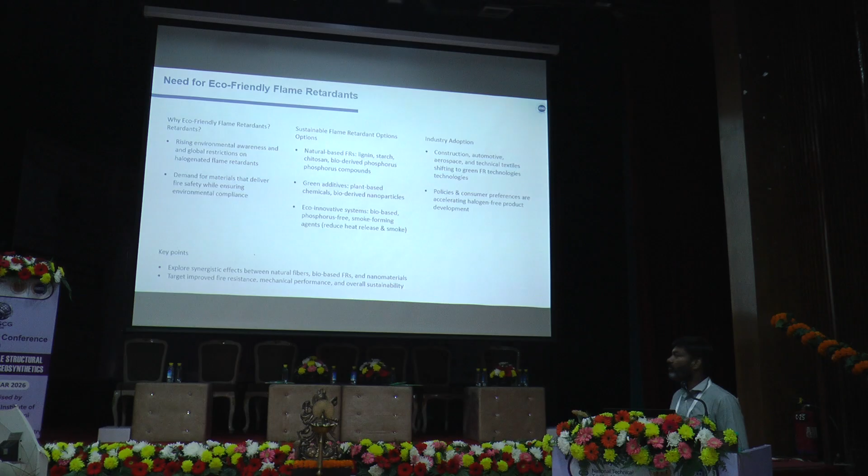And the thing is eco-friendly fire retardant. Right now majority of industries are using halogenated fire retardant, which is harmful to the environment. So here what we are trying to do is use non-halogenated fire retardant, so that it can also be considered a sustainable material.

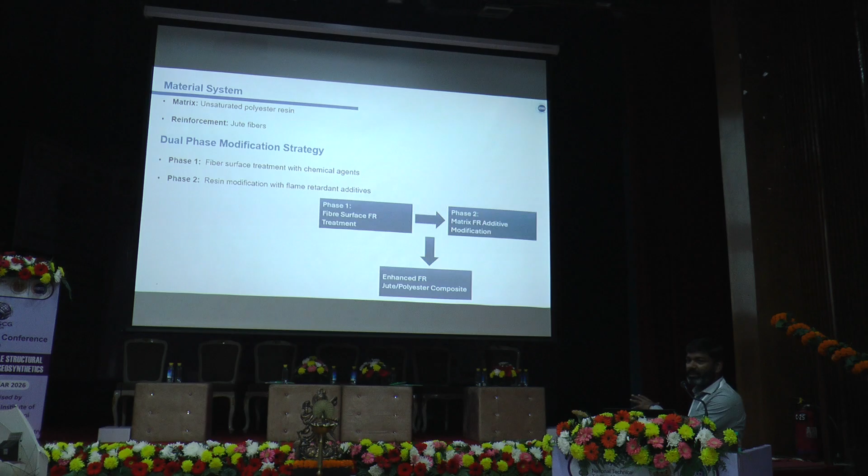I'm just skipping this, coming to the work. The material is unsaturated polyester resin, initially with jute fiber. However, there are so many new age fibers coming, as we already heard in the innovation session, and their applications too. Right now, as jute is available in abundant quantity, we have considered jute as the reinforcement material, and this is the approach: fiber surface treatment, matrix modification, and composite formation.

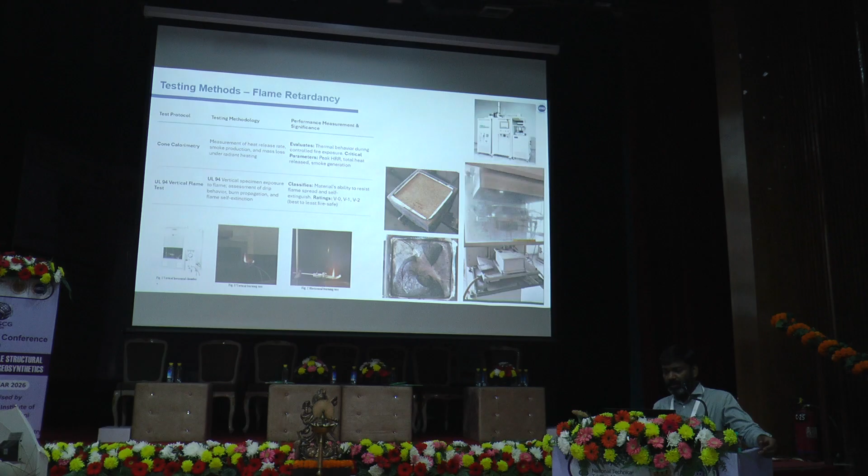Limiting oxygen index has also been adopted, and what we can see is that we have achieved, so far in one or two combinations, HL3. HL3 is a very stringent criteria. As per the EN 45545 R7 clause, at 50 kilowatts per meter square, the radiant heat is applied.

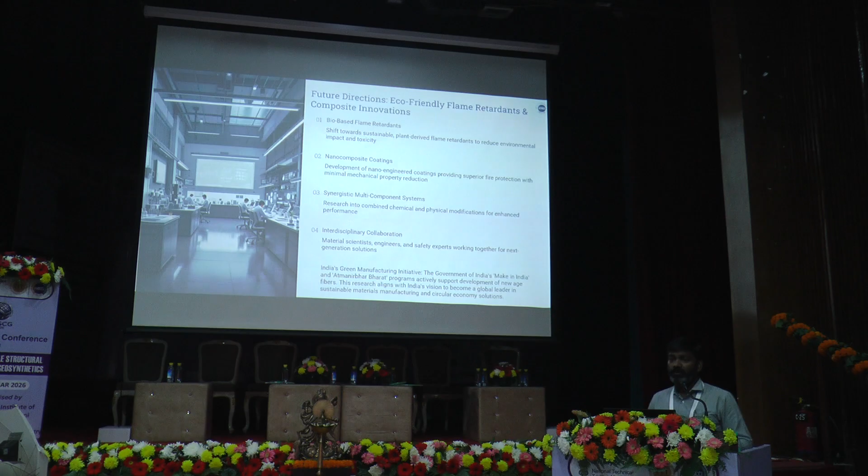Skipping this. So in conclusion, the dual synergy effect is helpful to improve fire retardancy in the natural fiber composite, and ultimately we were able to achieve up to HL3. We are also trying with other natural fibers, and this project is already underway with one railway component manufacturer. We are going to approach Indian Railways, specifically RDSO and ICF, for proposing these materials. With that, thank you.

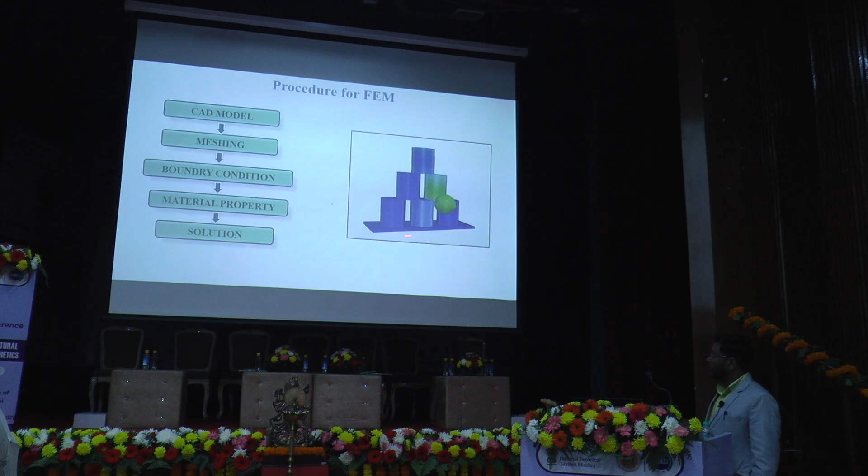Now come to the meshing of the object. There are a number of elements: bar element, square element, shell element, solid element. There are different types of elements we use to categorize the complex composite parts.

These are the boundaries, which are very essential for modeling composite materials. You can see in the figures there is one block; we give force in this direction, and this part is fixed. So there are lots of boundary conditions according to the impact scenario.

Now come to the material property. In the material property there are different types of properties. One is elastic properties, basic properties of the fibers, fiber and epoxy composite, and another is plastic properties. Plastic property is very important to see how the composite is damaged during impact or crash analysis.

These are the plastic properties, and these are the elastic properties of the material. We can find out the different properties using basic tests of the composite material. These are the tensile, compressive and shear tests for getting these properties for the composite materials.

Now come to the full scale modeling of the automotive fender. Generally, we compare the UD, 2D and 3D composite. This is a UD composite.

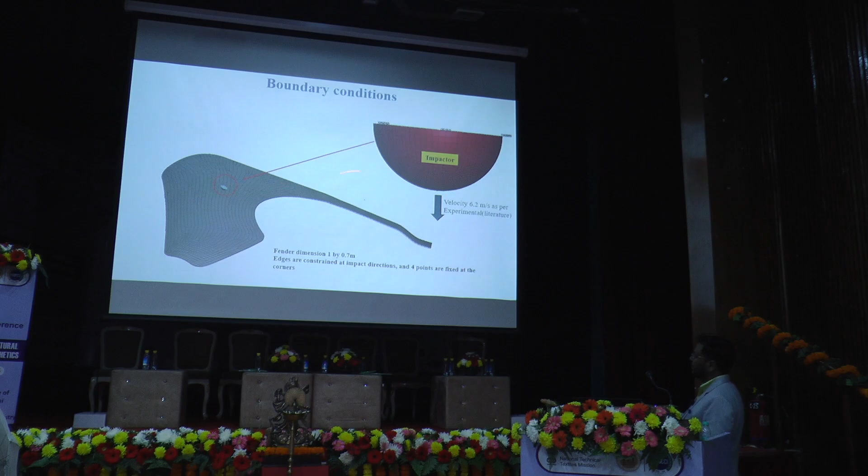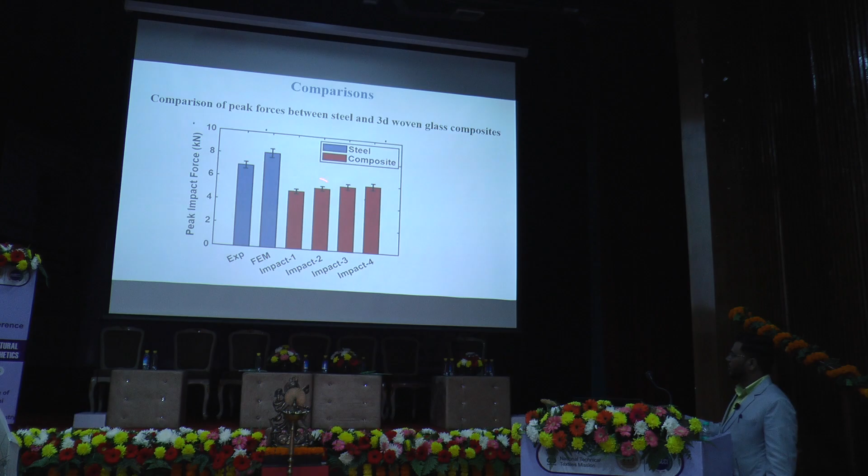Now come to the comparison between the force values. This blue one is for the steel material, this is for the composite material. In composite materials, force is very less as compared to steel.

Now come to the conclusion. We compared three types of composite, UD, 2D and 3D, and found that 3D is better as compared to the others for energy absorption. We did some FEM analysis between steel and composite, and found steel gets dented in a single impact, but the composite is not dented even with multiple, four type impacts. In pole side impact, the acceleration value is higher in steel, but in the composite the acceleration value is very less compared to steel. That's it.

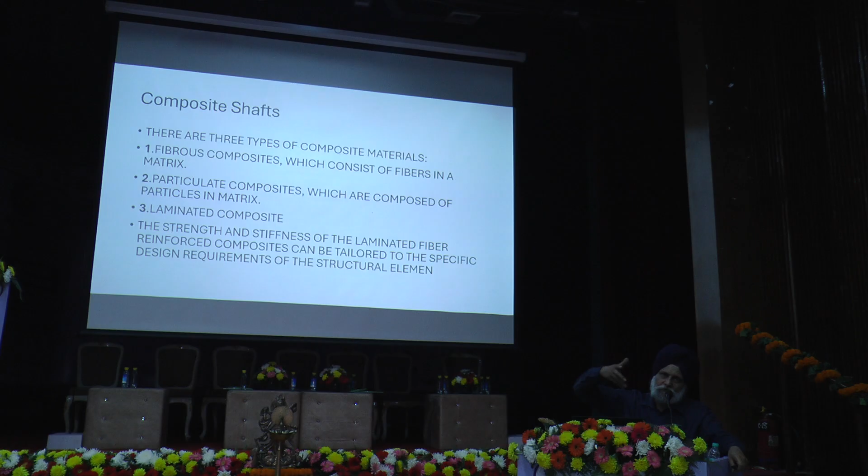So people also tried to use the metallic shaft. It was a composite shaft. One of the solutions proposed was the metallic shaft with an aluminium sheet on top, in order to avoid damage due to low velocity impact.

When we talk about composite shafts, it's not that every shaft used in industry is to be made from composite materials. There are only some niche applications where it is beneficial to use the composite shaft.

The thing which they have in common is that the length of the shaft is very large compared to its diameter.

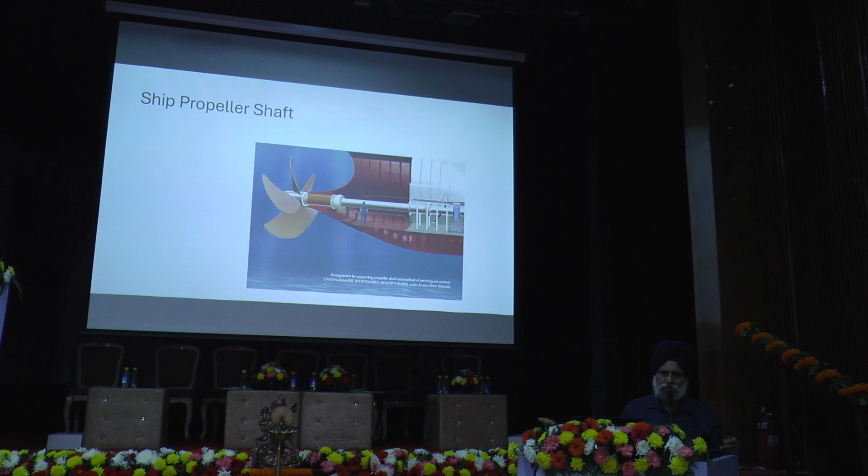So these are the applications where composite shafts are found viable. What we did in this study was a design of a propeller shaft, a ship propeller shaft. The same is also the case for automotive drive shafts.

A drive shaft which is long enough—for a front engine front wheel drive, we don't use a composite propeller shaft, but for a front engine rear wheel drive, where a long drive shaft is required, like in light trucks and army trucks, the shaft is so long it has to be made in 2 parts with an intermediate support. So the automotive drive shaft is also in the same application category.

So when we talk about the design of the propeller shaft, this was again one of the projects which we had done. What happens in the case of a propeller shaft is that there might be some weights or gears or various components attached to the shaft.

So what happens is that when the shaft is rotating, each fiber of the shaft, let's say in terms of axis, when it's at the top level, undergoes alternating tension and compression even when the load is stationary, because it's a gravity loading. Because of that, delamination happens and failure happens, and most importantly fatigue failure happens.

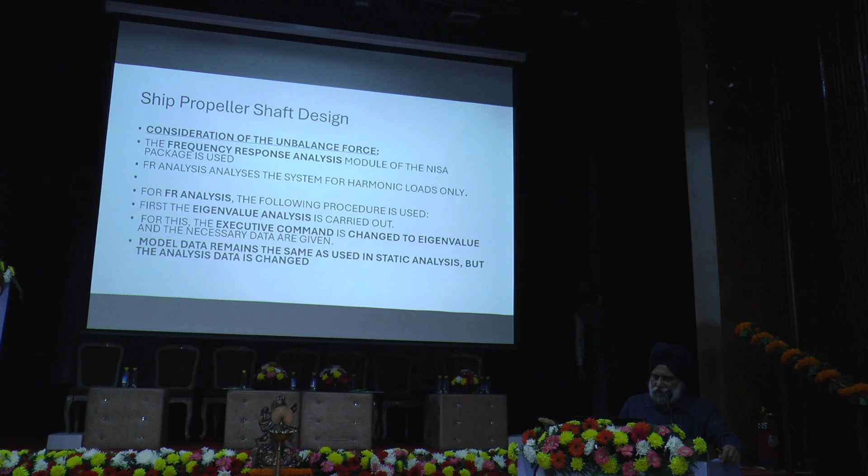There is some covering, but in between one needs to design this joint of metal to composite. This has been a serious consideration, and we'll see later also, this joint is one which leads to stress concentrations and becomes the reason for the failure.

So there are three things to be designed. One is what should be the distance from the end of the shaft. Inside the shaft we have a solid stub shaft, and outside we have a hollow composite shaft. There is a friction contact we maintain, but that is not sufficient - if any failure takes place, it will fail.

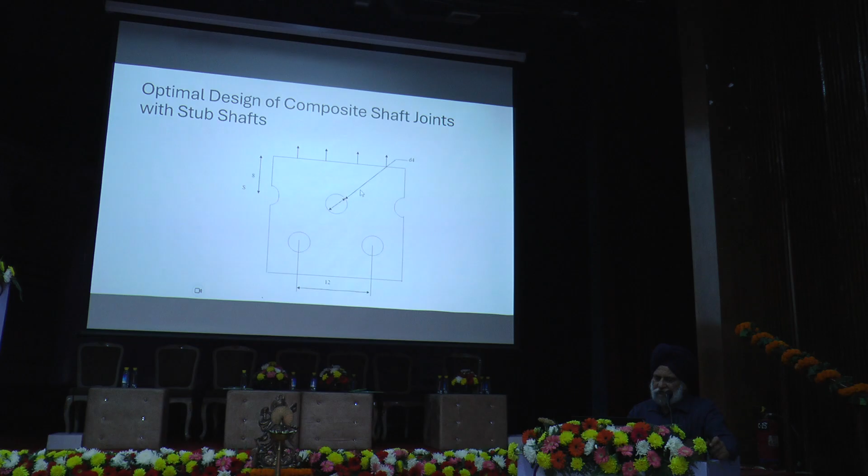Okay, so that was one option which we use whenever we are doing composite shaft design - we use those particular joint specifications. And currently, along with my colleagues, we are doing buckling analysis of composite shafts.

In buckling, what happens is, because most of these shafts are hollow shafts, whenever they are under torsional loading, they are going to fail by buckling. Of course delamination also happens, which we have studied separately, but in the buckling case, a buckling pattern will be formed.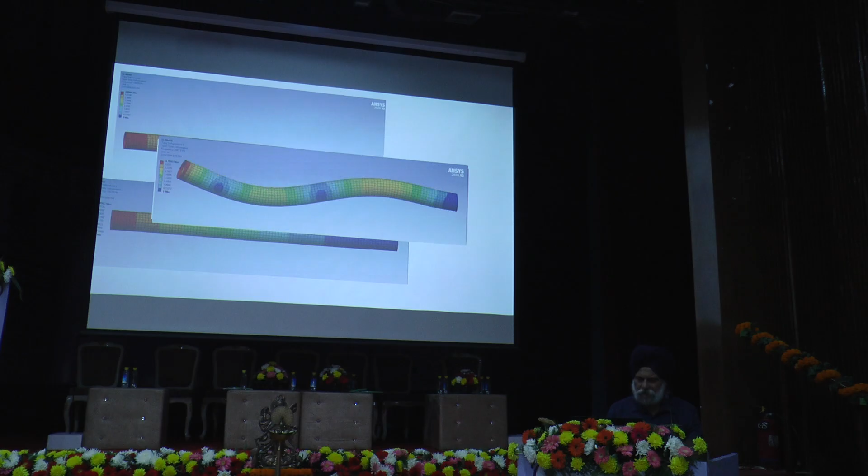So these are again some of the results - for example, these are different modes of the shafts. Then for the case of buckling, you can see in this diagram a buckling pattern, zoom view - a buckling pattern has started at one of the locations, and this is what we predicted.

So the work is still going on. One of the aspects which we are currently studying is the low velocity impact of these shafts.

So I just gave an overview of the various issues when we are using composite shafts. First of all, composite shafts should only be used in those cases where we want a significant length-to-diameter advantage. Otherwise, for short, small shafts, I wouldn't say composite shaft should be used.

So the design is based - we established a methodology for the design of composite shafts using finite element analysis and fatigue equations. Special care is also needed to create the joints between the metallic and composite stub shafts. The buckling failure analysis has been conducted and matched with the theoretical analytical calculations, and based on that, the optimal configuration is also recommended. Thank you, I would welcome questions.

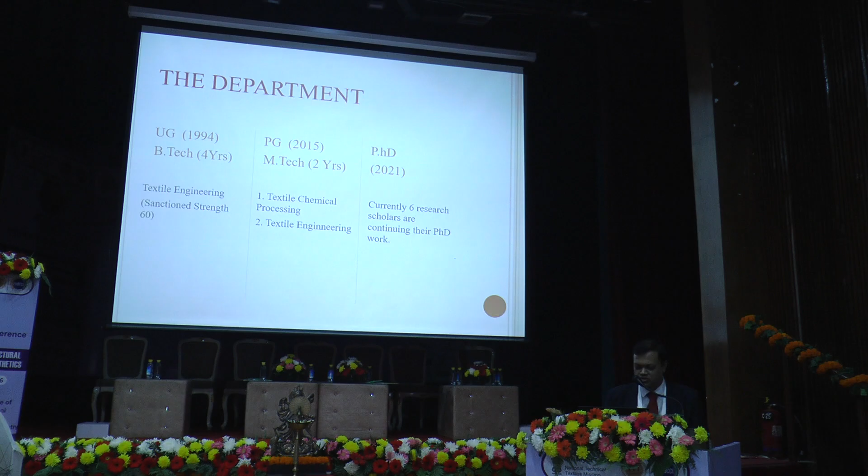The outline of my presentation will be like this. Coming to the motivation part, why did we go for presenting or investigating? It is regarding sustainable engineering materials, where we have used natural fiber composites.

Jute, coir and sisal are all available in the coastal city of Bhubaneswar, which are renewable and to some extent waste products from farming. The coconut shell biochar is a functional filler which can enhance the mechanical strength, dimensional stability and moisture resistance. Moisture resistance is one of the key bottlenecks of natural fibers, which lose strength due to the presence of moisture.

This study aims to transform agricultural waste also, because sometimes people throw these fibers out from agriculture. So what are the leads for coconut shell biochar?

Coconut shell biochar is a rigid carbon-rich filler that enhances the tensile and flexural strength by improving stress transfer within the composite. It reduces the moisture diffusion pathways, thereby improving the dimensional stability. The porous microstructure of biochar promotes better mechanical interlocking and fiber-matrix interfacial bonding.

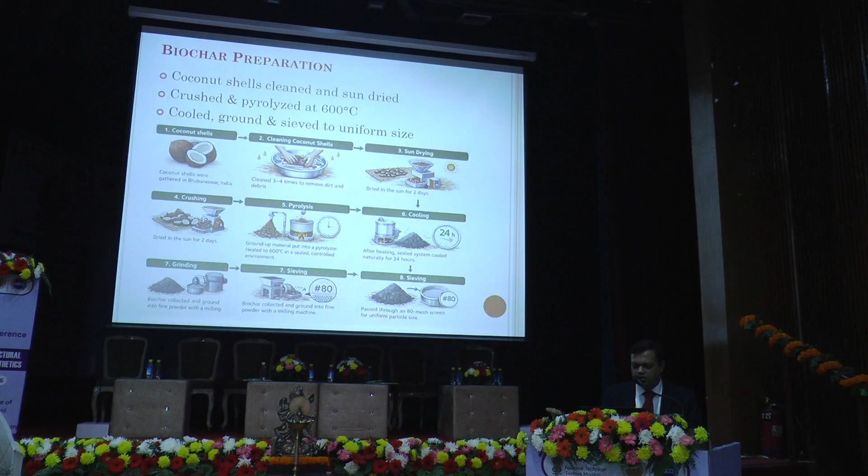This is the proposal for biochar preparation. Pyrolyzed at 600 degrees Celsius, coconut shells were ground and sieved to get coconut shell biochar.

This is the composite fabrication that was made with a compression molding machine. Needle punched hybrid fiber weave was prepared in the card. Then epoxy and biochar were sonicated and applied on the compression molding machine. Cured composites were cut for different testing conditions.

This is all about the specification of composites, part of the research. So I have shown only four composites; in fact, we prepared almost 30 with different variability. This is the different weight fractions that were used, and you can get the fiber volume fraction of 52 and 55%, which is quite good.

These are the different characterization techniques that were followed for water absorption, tensile, flexural and impact properties. We also went for TGA and SEM imaging after the testing.

Water absorption test was conducted according to ASTM D570-98, with immersion up to 120 hours. Water uptake was calculated using this formula.

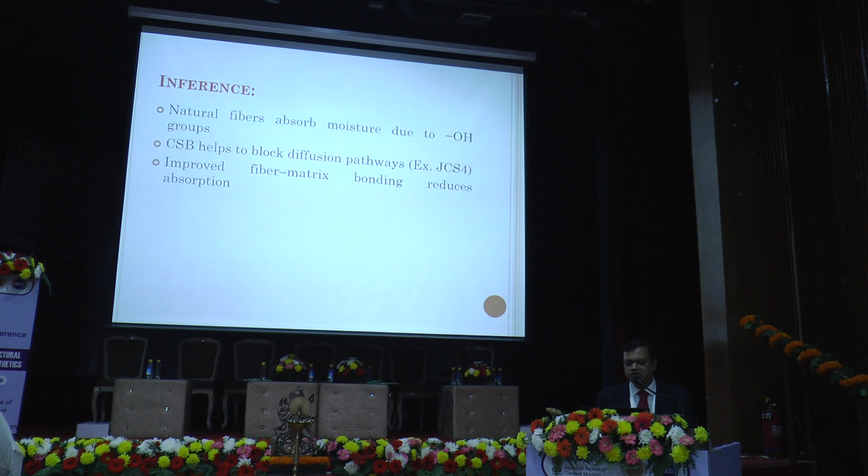Natural fiber absorbs moisture due to the presence of hydroxyl groups, and the coconut shell biochar helps block diffusion pathways, which was found in the JCS4 composite. Improved fiber-matrix bonding reduces moisture absorption.

Tensile testing was done on an Instron 5966 machine with 10 kN capacity and a cross-head speed of 5 mm per minute. The results show both dry and wet conditions. The reduction in strength was almost lowest for JCS4, which had 10% biochar loading.

Flexural testing was done using the 3-point bending method with the same machine, at a cross-head speed of 2 mm per minute. The flexural strength results for both dry and wet conditions show dry strength is always better except for JCS3. In wet condition, JCS4 has good retention, better than all others.

Impact testing was done using an IZOD impact tester with 25 joule capacity, and here are the results.

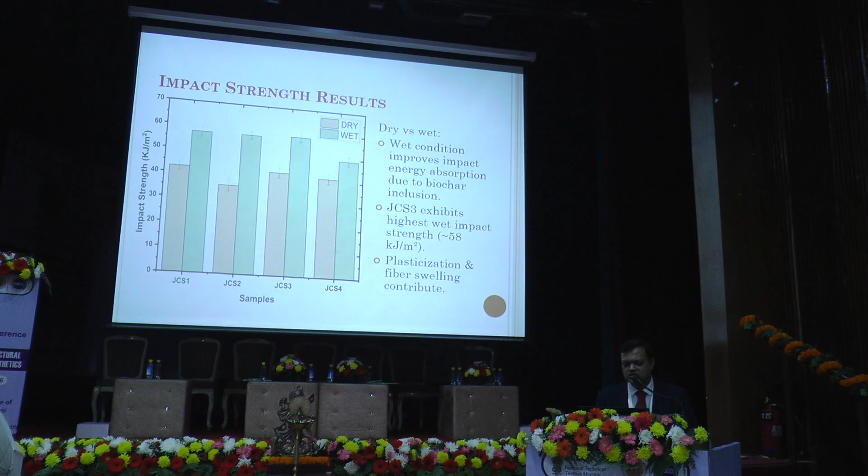Dry versus wet strength results were compared, and it was seen that wet condition improves impact energy absorption due to biochar inclusion, which was very good and encouraging. Sample JCS3 exhibits the highest wet impact strength of almost 58 kJ per meter square.

We performed thermal analysis (TGA) up to 850 degrees Celsius. Up to 400 degrees Celsius, the principal degradation happened, and JCS4 shows the highest thermal stability, having higher fiber volume fraction and biochar content.

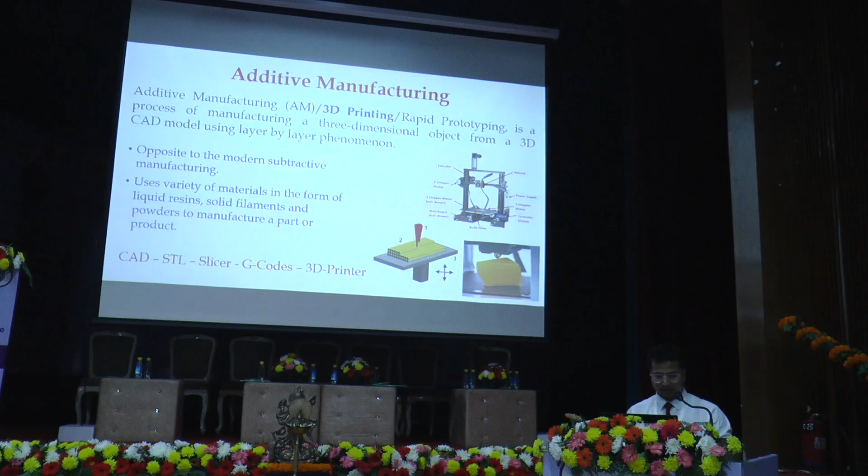Some machine learning insights. Additive manufacturing, popularly known as 3D printing, is a process of manufacturing 3-dimensional objects from a 3D CAD model data.

It is opposite to conventional subtractive manufacturing, and it uses a variety of materials in the form of liquid resins, solid filaments and powders. To make a product, we first design a CAD model, convert it into STL format, then slice it to generate G-codes, and give it to the 3D printer.

Dynamic mechanical analysis is a technique used to analyze mechanical properties, especially the response of a material to an oscillating stress or strain input as a function of temperature, time and frequency, or a combination of these parameters. It is valuable for polymers, rubbers, composites and biomaterials.

Storage modulus is the material's ability to store elastic energy. Loss modulus is the material's ability to dissipate energy as heat. Damping factor is the ratio of loss modulus to storage modulus.

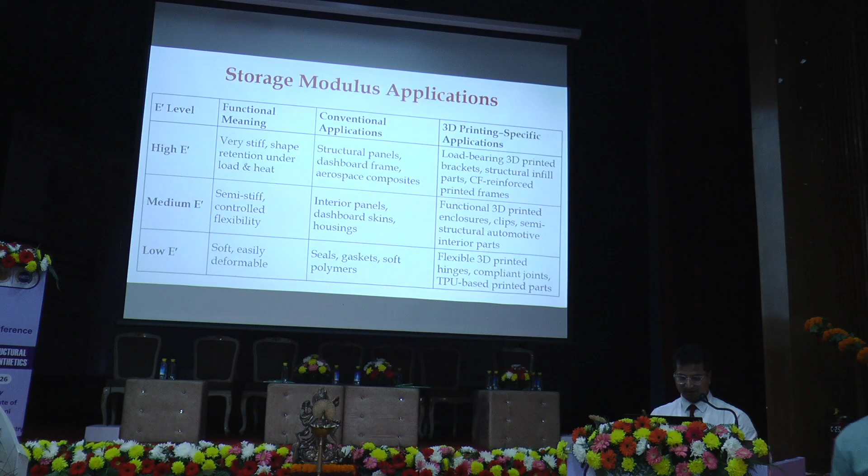Damping factor is the ratio of loss modulus to storage modulus, and it indicates how effectively a material damps vibrations by dissipating energy relative to elastic storage.

Then it comes to machine learning. I was having 4 variable printing parameters, which were layer height, infill pattern, printing temperature, and infill density. M prime was storage modulus, and M double prime is loss modulus, denoted either by E prime or M prime. Tan delta is damping factor.

So these are functions of these 4 input parameters, infill patterns: F(M prime), F(M double prime), and F(tan delta) is your machine learning model, how it was trained, and E is the error between the experimental data and the machine learning predicted data.

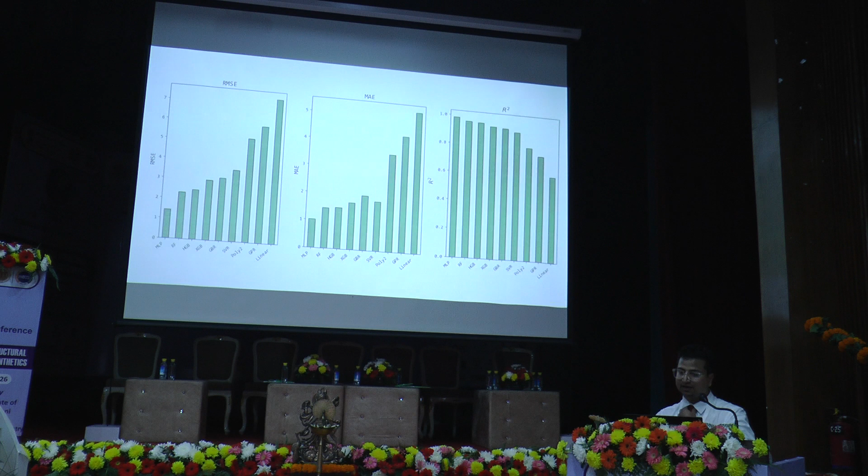Similarly for loss modulus, MLP gives the highest R-square value, so I chose MLP for loss modulus as well. For tan delta, you can see the data is not plotting well on the 45-degree line in several models. So for tan delta, I chose HGB, which is a histogram based boosting regression ML model.

So this is what I got from this machine learning analysis. I got to know which parameter is affecting my property and in how much manner. The best parameter was test temperature, because it is a testing parameter, so it will be giving the best value in all 3 cases.

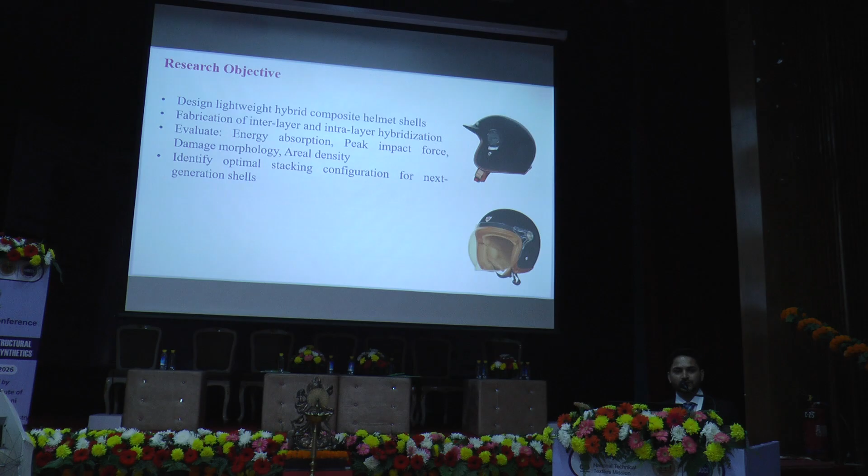Coming to our research objective: design a lightweight hybrid composite helmet shell, fabricate interlayer and intralayer hybridization, evaluate energy absorption, peak impact force, damage morphology and areal density, and identify the optimal stacking configuration for next generation shells. These are the materials we utilize: Kevlar, carbon fiber, Dyneema and Zylon, along with epoxy matrix having viscosity of 1000 to 1500 millipascal second.

Coming to our main research focus: the inter and intralayer hybrid approach. We are trying to develop a lightweight helmet shell using this approach, in which on the back side we utilize various fibers - Kevlar, carbon, Dyneema, Zylon - and that is the interlayer hybridization.

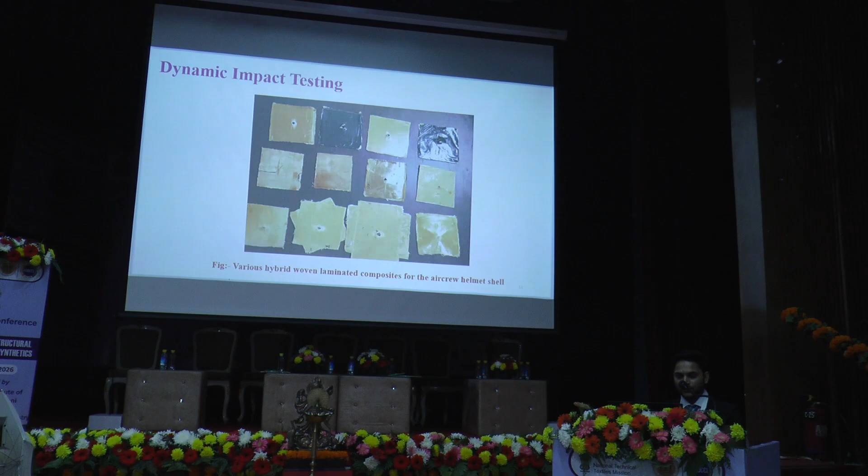So here, after the impact testing, we tried 12 samples with different stacking sequences and laminates, utilizing different interlayer hybridization approaches.

After that, we analyzed the damage morphology using microCT analysis. This is the impact penetration test according to Federal Motor Vehicle 218 DOT standard, where the striker penetrates the helmet shell from a 3 meter fall.

In impacts we assess force versus time, force versus displacement, and energy versus time. These are the impact test results of all 12 samples, where we found that Dyneema Kevlar based interlayer hybridization along with carbon layering provides a peak force of 3078, and Dyneema Kevlar plus Zylon Kevlar interlayer hybridization shows a 3692 peak force.

Mostly the samples with carbon combined with Zylon and Dyneema provide a higher peak force and displacement, along with total energy absorption at a minimum thickness.

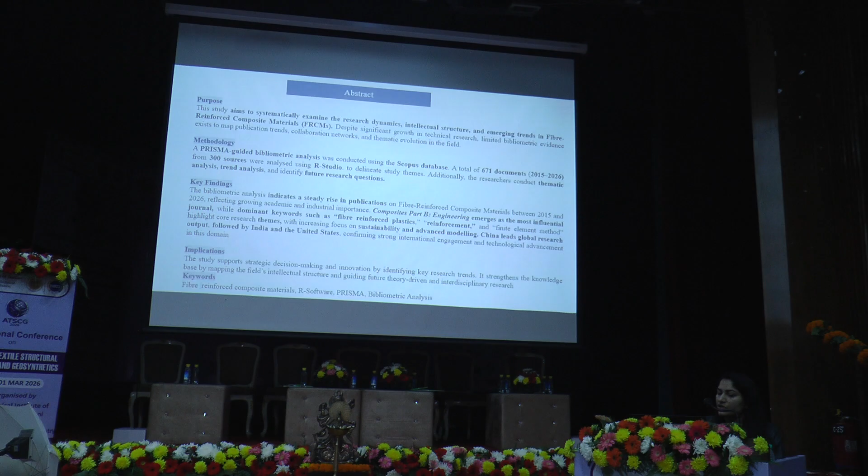The key findings show that the publication trend is rising in this domain, and Composites Part B: Engineering journal is the most productive and relevant journal in this domain. The highest used keywords are fiber reinforced plastics, reinforcement and others. Looking at the most productive country, we found that China leads the global research output, followed by India and US. So future researchers and policy makers can benefit from this research and use the insights in their upcoming decision making.

Moving to the introduction section, firstly we know that over 50,000 plus engineering materials exist in the material world, among which metals and alloys are high in strength, ductility, and thermal and electrical conductivity, then polymers, then ceramics, then advanced materials.

In composite material we have matrix type structure and reinforcement forms. In reinforcement fibers we have glass fiber, carbon and aramid.

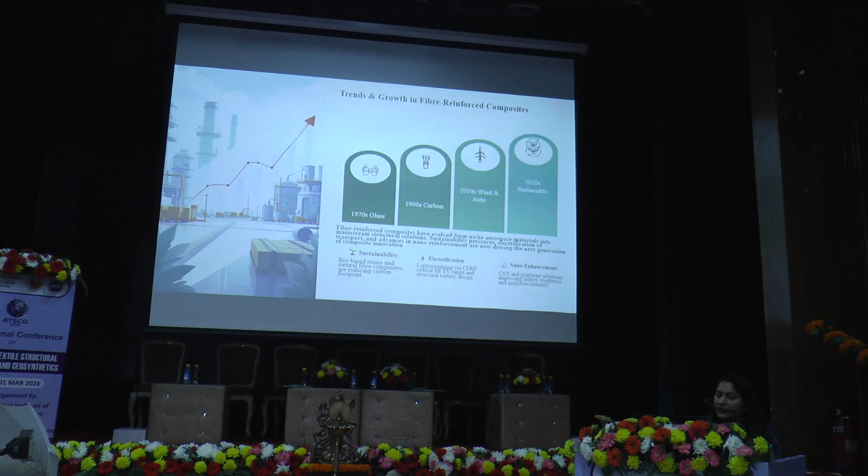Talking about trends and growth in fiber reinforced composite, we found that in the 1970s glass was there, then carbon, then wind, and in 2020 the sustainability era started. Now sustainability and AI are very beneficial in upcoming future research, because of bio-based resins and natural fibre composite material which are highly usable.